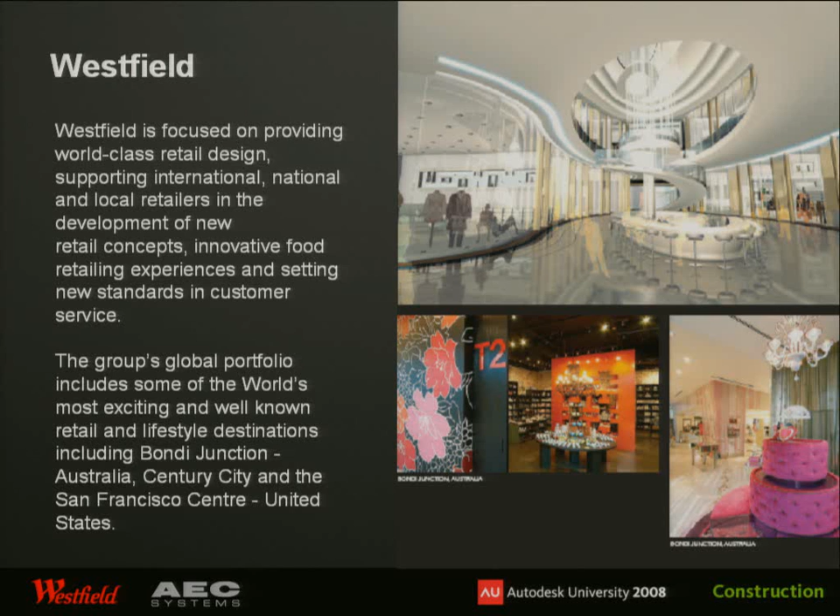AEC Systems, well, we're a reseller. We certainly have been working particularly with Navisworks since before the Autodesk acquisition. So we're the most experienced when it comes to Navisworks integration through things like construction. Also in the mining field, we have a lot of clients who use Navisworks in mining and resource planning and resourcing. And also moving now through into pre-design, so Navisworks being used in architecture, and now obviously with Westfield's use of it in construction planning.

I've got another animation, that's a little note for me, so just bear with us. You've all seen that one. So as slick as we're trying to be.

What I might do before we just start here, we're trying to do this as a presentation of 2 halves. There's the glitz and the guts. So being an architect, with my architect hat on, this is certainly the glitzy part. When we finish my presentation and hand over to Gary, you'll see that's definitely the gutsy part.

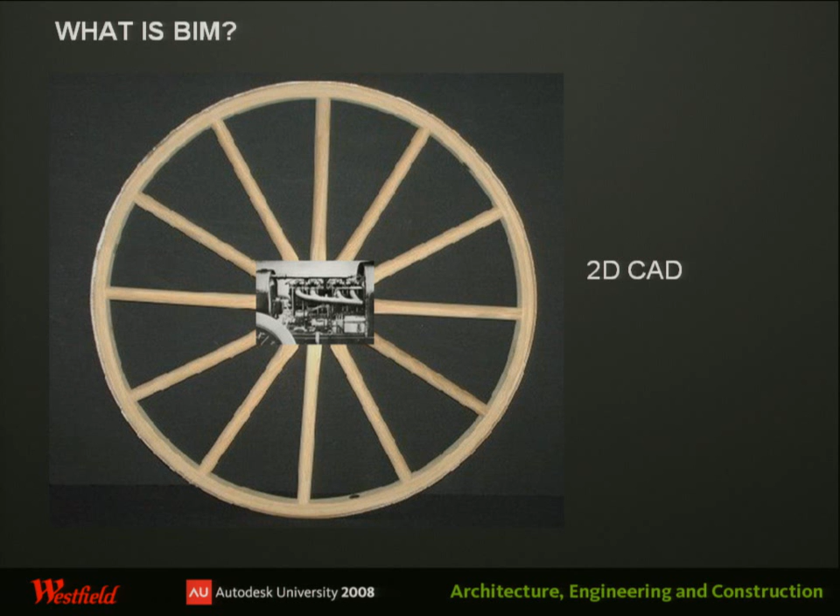So at Westfield, we've invested millions of dollars. We've gone Revit. So today, we have this. All right, we've got a nice, sparkly V8 engine. I talk engines because most people understand engines. But it came a point, okay, we've got this new Revit engine, it's fantastic, it sparkles, it's great, everybody's talking about BIM. But at Westfield, I asked the question, what are we getting on the rim of the wheel? And all we were basically getting is drawings still.

And to me, if we're only getting drawings, that means we're still only using 4 cylinders. So the question was, what are we doing with the other 4 cylinders? And to me, the other 4 cylinders is the BIM information. Because everybody's scared, especially in construction, if you mention the word BIM, it's got the word modelling in it. So therefore, construction goes, oh, it's nothing to do with us then. That's you lot, that's nothing to do with construction. So I've had to explain it this way.

And the reason I've shown that wheel is because it's got 2 channels, so it's got 2 spokes. One channel is, how I see it, the traditional way of delivery. And the other channel is the BIM information. And they tend to understand that, they can get their head around what BIM is now.

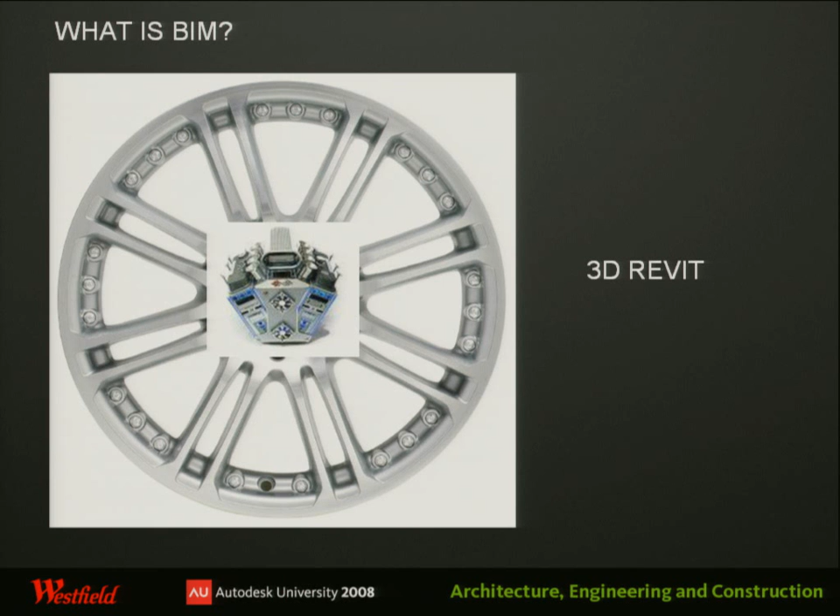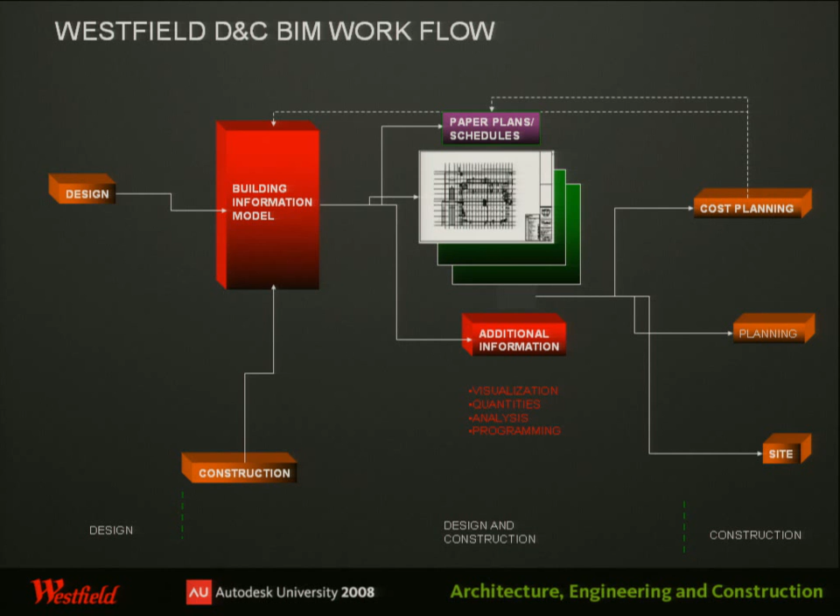And this is just a little graph here. In construction, they're all worried that you're going to take their traditional drawings away from them and all this. So we've come up with this little chart here to show at the top, they still get their drawings, they still get their schedules, but BIM is additional information.

Now here's my Lego. So I'm going to tell you a little story. I've got a little 7-year-old boy, and the other week we bought a Lego. So we've gone home, he's opened the box, thousands of Lego pieces in the box. And he says, how are we going to make this, Dad? So I says to him, don't worry, son, I'm a construction planner. And I can exaggerate, I said, I'm the best construction planner in the whole wide world, actually, little man. I said, wait until the morning, I'll do you a construction program. So I did. And there it is.

Okay, so there's the police station of this Lego city. Fantastic, you know. Select 2 single white columns, 50 millimetres long. So I gave it to him, and this is page 78 of it.

I said, here, son, come in. You can be the foreman. There's your program. So he looks at it, walks away. Like a typical foreman, he came back and said, I don't understand that. That's no good to me. What am I supposed to do?

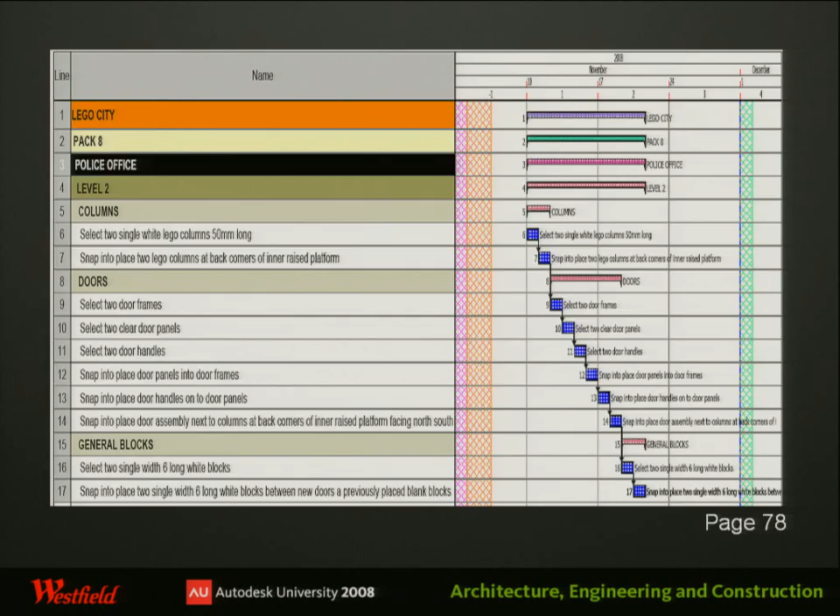I said, take a couple of days, try and understand it, come back in a couple of days. So 10 minutes later, he came back with his hand behind his back. He said, Dad, at the bottom of the box, I found this. Can I use this? I was devastated. All that hard work, all that planning, and he's come out with this.

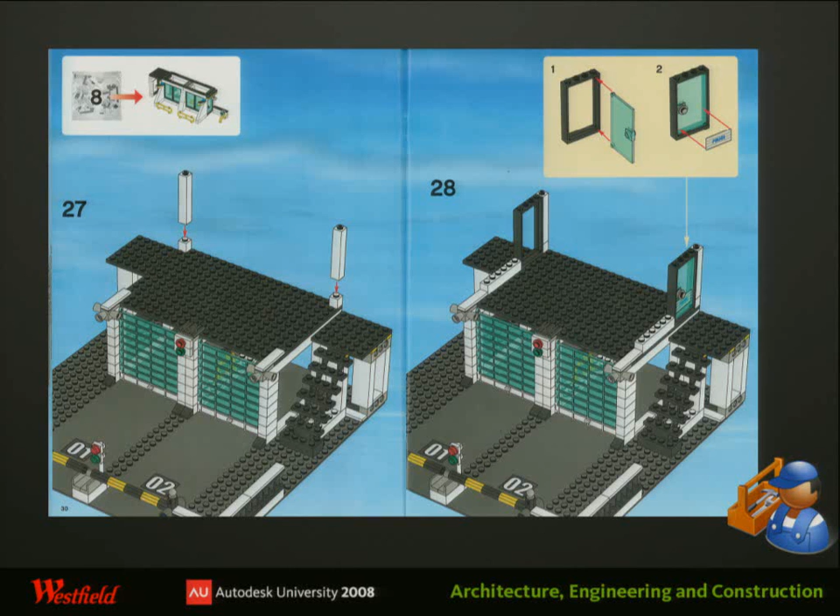So what I'm saying here today is what Navisworks does, it's Lego for adults, Lego for grown-ups. And there we go. It's not quite the same as Lego, but it's close enough.

I'd say you're all pretty familiar with Navisworks, or you're pretty new. I guess one thing is, just in the audience, who's here from a construction side or a contractor side? That's excellent. And who is using Revit, or who's heard of Revit or knows Revit in that process? We're fine then. All right. Oh, I'll stop there then, don't I? That'll do me.

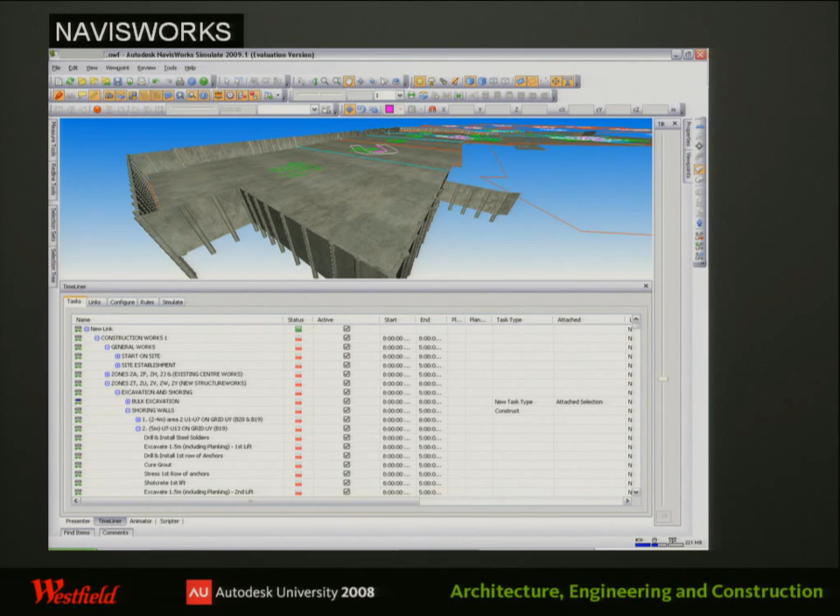Okay, yeah, so it brings the Revit model in, and it brings the construction program in. So the last couple of years, and Christian in the front here is very aware of this, I've annoyed the crap out of him for the last 1.5 to 2 years. Every day, why are you doing this, why are you doing that? And through that process, because they've been using Revit, but not really using it for BIM, for construction, there's a lot of things in the Revit models that we can't use because they're not modelled correctly. And here's just some examples of what they are.

So this is basically what my son said. So when you usually issue a 100-page program, the response is normally, my God, can you summarise it? And often a construction job will go off in a different direction because a foreman or a site manager doesn't understand the construction program, so he'll go off on his own and do something else.

Okay, just before we start, I'm just going to show you the Revit file structure, Navisworks file structure. So you start off with your Revit files. You might have, say, 4 files that make up a model. They're exported to an NWC file, which is then all linked into a NWF file. It sounds quite complicated, but it's very simple. That NWF file is a very small file. It doesn't actually open the NWCs, it only reads them.

And then from there, we do an NWD file, which is basically a snapshot of your Revit model at any time. And it's that file that actually comes to construction.

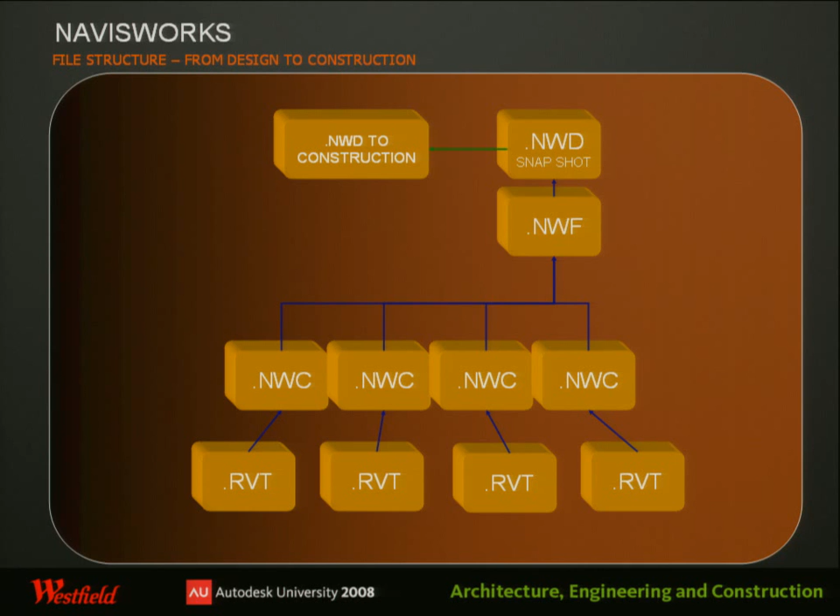And how long have they been using that now? Who designed that process? How long have we been using it? 6 months? It's all very new. I've always used it. I've used Navisworks for about 2 years now. But it's only now that design are listening to construction, because we want to use BIM. So design need to know how they have to give us this BIM. So it's only now that I'm getting NWD files from design. Whereas before it was only my own work and I would show them. Okay, so that's the general file structure for construction.

So this one is for design. So you can see you've got month 1 and month 2. The good thing about that is, like I say, you can do a snapshot in time. So at the end of month 2, you can compare month 1 and 2. So from that NWD file on your right, you can make another NWF file and compare the 2 NWD files. So this is good for if you want to check your productivity, if you like. How much has the model changed in 1 month?

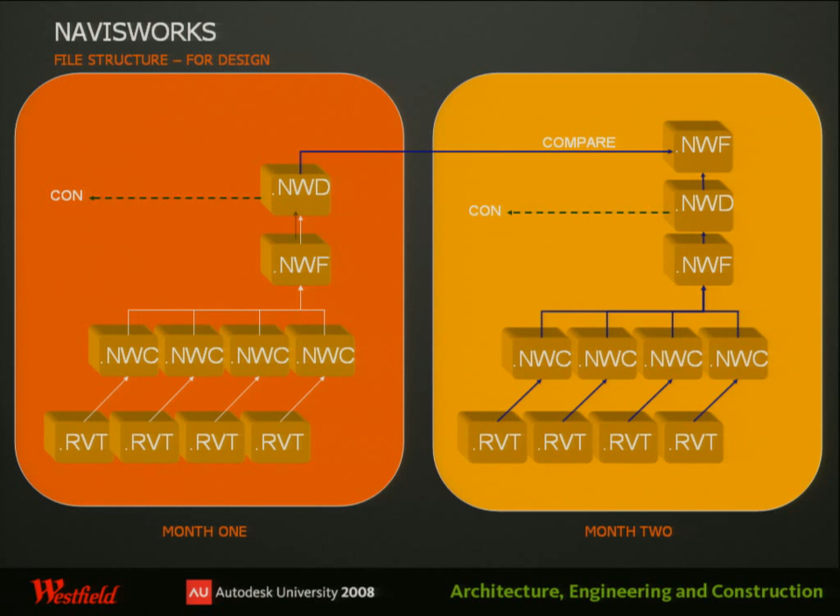And if you had a snapshot over several months, you can compare the first one to month 10. So you can actually see what your productivity of the model is. Okay.

One of my biggest issues is the generic model, the generic family. I'm not even sure what it's called, I just know it's generic. As you can see, this concrete slab is apparently done in an in-place family, with subcategory individual concrete slabs.

So when you bring that into Navisworks, it can't read them. Well, it brings over one big thing with minimal properties. So if you want to find things in Navisworks, you mainly use the properties to find things, but if it's a generic model, it's hopeless. You can't do anything with it. So when it comes to simulation, I have to simulate the whole thing, I can't simulate the individual pours.

So that was pretty typical of how Westfield would have modelled it. It's modelled correctly, as in on the plans, the documentation, the sections, it's fine. Documentation-wise, it's fantastic. But unfortunately, seeing they got Gary involved now, he's made them work harder.

Because when it comes to Gary's team, who now have access to this model, he's saying, hang on, that's not right. So you said you've got a chair now doing your design. Well, yeah, I should get a chair there. They keep offering me one.

Not only can I not simulate it, we are trying to use the Revit model to take off quantities as well. And we're using a software called CostX to do that, and if a generic model comes in, it just measures the whole volume as one, and it's hard for the cost planners to actually work out what it is.

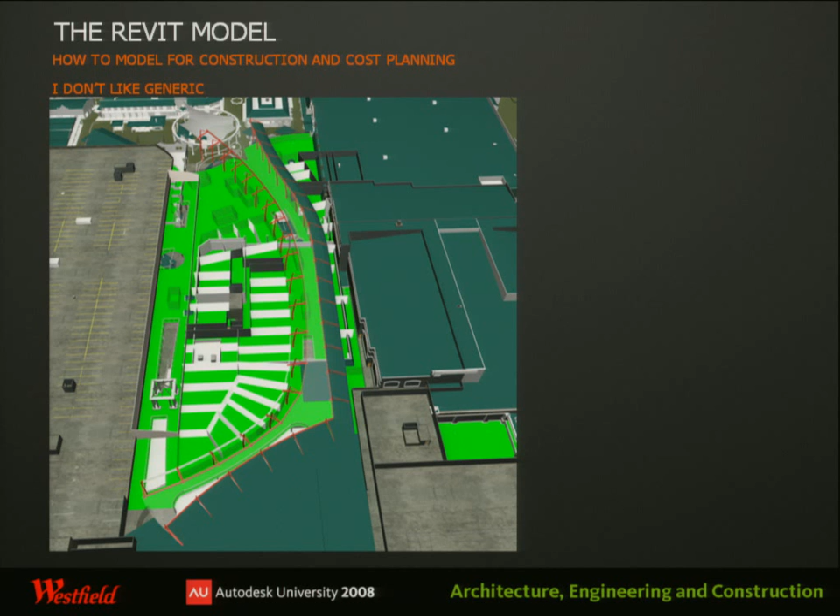As Gary goes through the presentation, you'll see why. So move to the next one. So basically, that's the whole generic family there, whatever it's called. Now, the reason that's no good to you, Gary, is what? Well, I've explained it, it's got minimal properties. I can't simulate each individual pour, and when it comes in for the quantities, it's just measured as one mass of concrete, which doesn't really work for the cost planners.

Because the cost planners, they're hard work, and unless it's right, they go, well, stuff that, I'll just use what I've been using for the last 150 million years. Okay, so here's another generic model, this is a parapet wall.

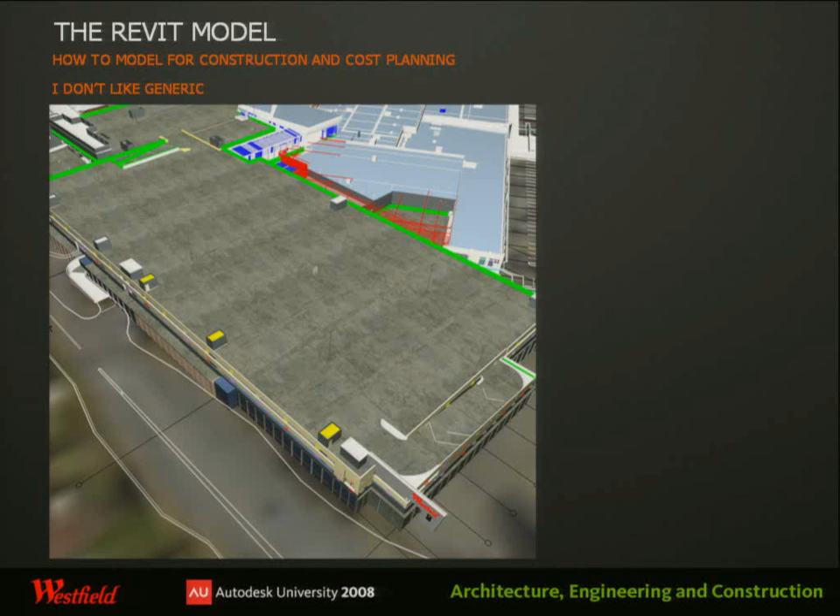As you can see, everything green is just one generic family or model, I don't know what it is. I'm not sure of Revit terminology, so I've just called it a system or category family type. So if you use these type of families, as you can see in this hose reel, I can actually select the hose. So I guess they work.

What we're experimenting with is the ideal ways and workflows of getting information out of Revit, feeding it into someone like a construction firm. Now, the luxury that Westfield have, and you might have firms in America that do this as well, but from my architecture background, we hardly ever would deal with the construction firms. So the plans go out, if they want a couple of animations they can have them, but generally the constructors don't see that, they're working off the plans only. So how we get to those plans, and obviously within Revit it's a very efficient system.

We know that there's change management, we know that there's consistency throughout the drawing package or documentation package, but how we actually model the individual items, there's no real feedback. So, we can get away with things like this.

But with Westfield, because their construction division and their design division are in the same building, although separated by, 2 or 3 floors? 2 floors. They wish it was bigger now.

Gary's now interrogating that model through Navisworks, going back to those guys and saying, hang on, you need to improve the model. So it's not as if it's wrong, but it needs to be improved. So I guess a feedback cycle that Westfield are doing, and that's why we're here for a presentation like today, would benefit the rest of the industry. The ways that they're now modelling their building for documentation is with a construction planning thought as well.

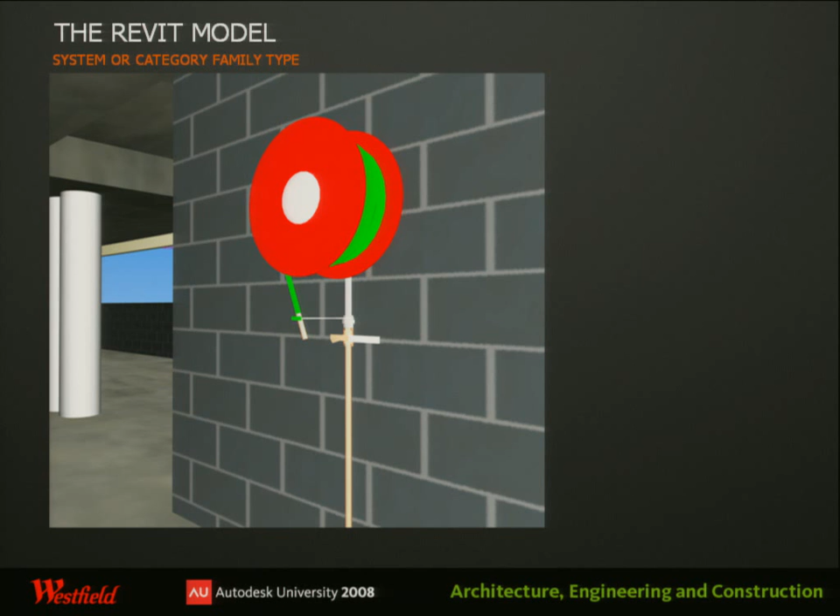And I had a big issue. I was, oh no, we can't. That's too time consuming. And then I learned there was a split tool. Split walls. So that's really time consuming, is it? You can still draw it, just split it where the expansion joint is. So now they've started to model as it is in the real world. If there's an expansion joint in a wall, put it in, put a gap there.

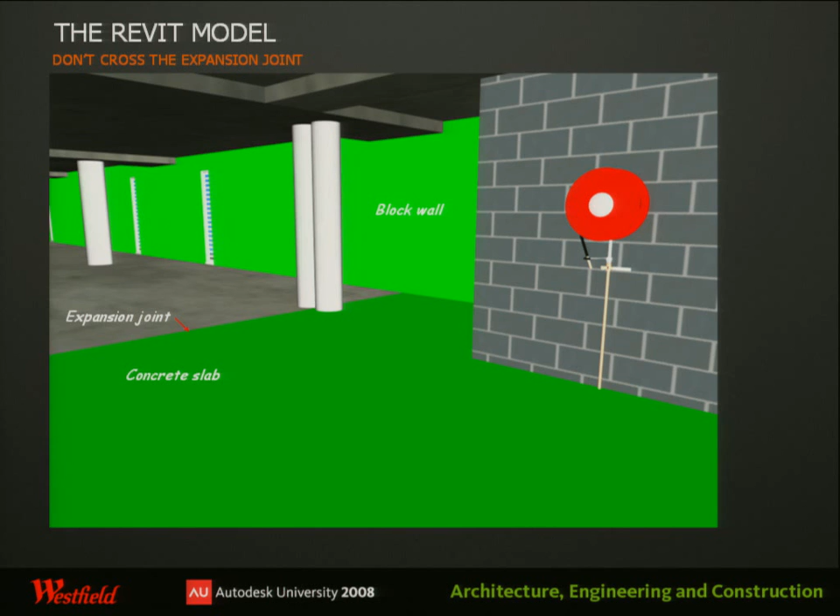What's my next one? So what this slide's about is, in Navisworks, there could be 20,000 objects. So my question is, where is it? Give me some idea. And what we started to do in Revit is putting our zones in and structural blocks in. Actually, in Revit itself. So when it comes over to Navisworks, you can't really see it on the right, but I get the properties of them. So I can go and search for everything that's Zone E or on structural block 7. It just makes looking for things a lot easier. So they're located within a construction area? Yeah.

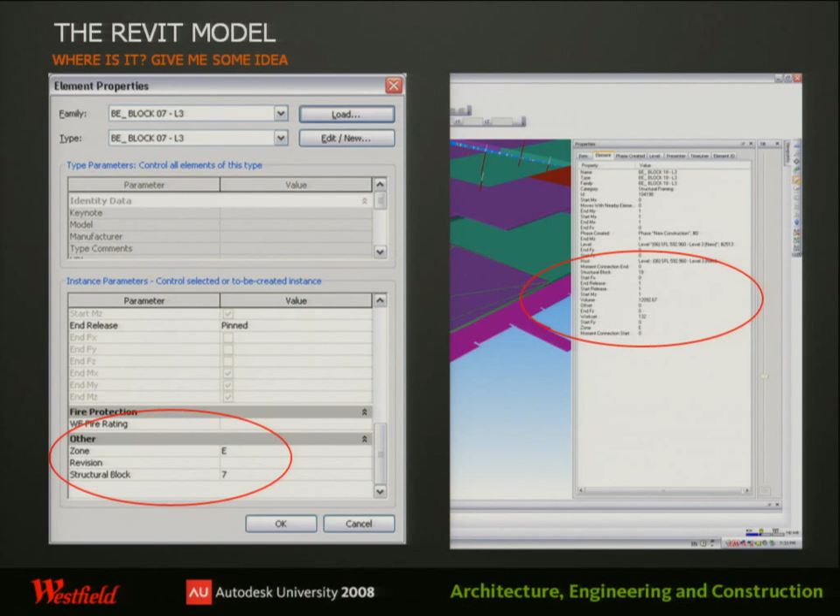Yeah, so now they're fed back into a building from day one. I think the process would be that a general building site, you'd block it up into construction zones? Yeah, we use construction blocks, basically a pour, a concrete pour slab. And once you set that up, then you feed that back into the design team who know how to allocate that parameter. That's right. Yeah. Have you guys developed a design language between you and the architects with every future project now? They know when they're designing it to classes and areas for different zones, when it gets to you?

Well, actually, the actual zones come from the structural engineers, and then everything is based on that. So they know well in advance. But the design language, I think, is a good one. It's basically do as Gary says. Yeah, that's it. Do as you're told.

If you're setting up for concrete floors, what about all the other breakdowns that you're going to be using? You've got the zones for the pours, but everything that flows after that, masonry comes in when you're finished. But the masonry is still in that structural block. So the question for those who couldn't hear it is, it's fine for the pour, but that zone terminology is going to be used for every element in that model. Yeah. So whether it's hoardings or whether it's walls, they're all associated within that zone. In that block, yeah.

As a construction planner, I do everything as a structural block for structure. Then when it comes to the finishes, I do the wider zone, like mall 1, mall 2, that type of thing.

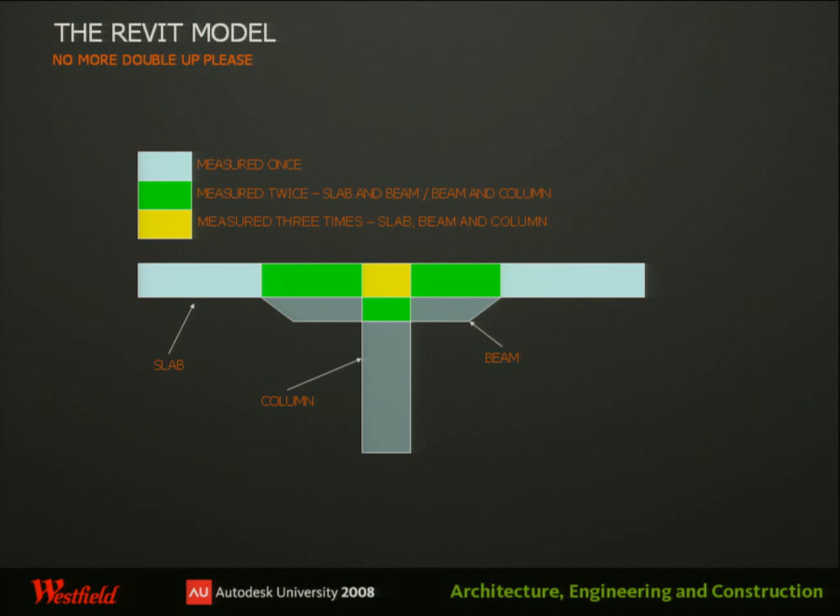Okay, another thing we've done in Revit, this is purely for the cost planners, we were getting the Revit model coming over into the quantity takeoff program, and it was just all by your family categories, which obviously the cost planners didn't understand. So we've customised our assembly codes in Revit. And we've actually structured it as per the Australian standard method of measurement. So everybody knows where this list comes from. So now when it comes in, the cost planners know exactly what is what. Right. Is a slide coming up with your wheel? So basically explain who uses what. Oh yeah, it's coming up soon.

Okay, this is the window you get when you export from Revit. The only reason I'm showing you this is the world units. It comes over in feet, and I would recommend you just leave it in feet, even though we're all metric in Australia. They're all feet. Yeah. But we have to leave this in feet. I've got no idea why. All right.

Okay, another thing we've been doing with Navisworks. You've got 20,000 objects in the model. I've got 7,000 activities in my construction program. The problem with Navisworks is you've got to manually link them. And the problem is it's like Revit's made of all squares. The construction program is made of all circles. And there's nothing similar that you can bring them together with. Even though Navisworks has got these auto rules, you have to have a common property to actually bring them together.

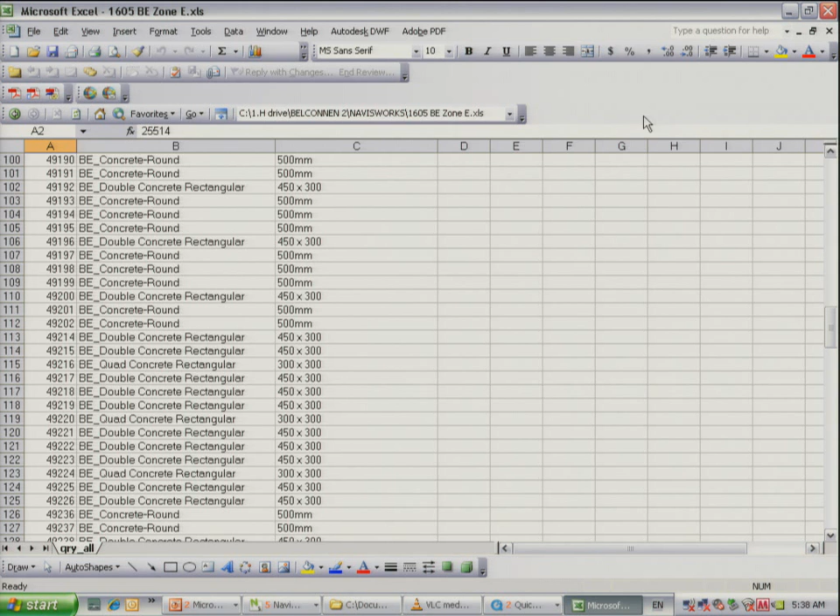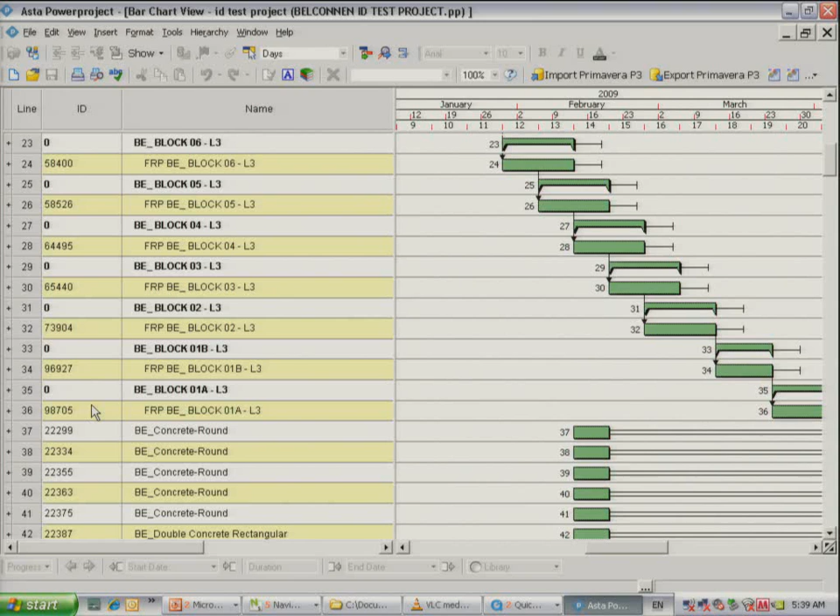Now, why isn't that open? Oh, there it is. So this is how Christian gives me all the objects, and they've all been exported from Revit. So I take them and I dump them into my planning software, and there they all are. The only thing I'm really trying to get out of it is these ID numbers. If I've got the ID numbers, then I can use the auto rule in Navisworks to link everything up.

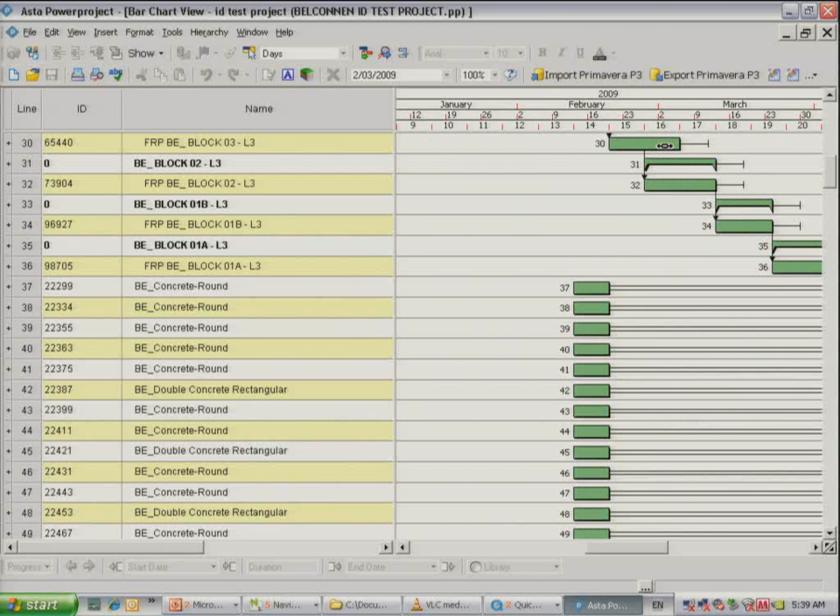So everyone's familiar that Revit, at the end of the day, is a very visual database. Every element in Revit has an element ID, which gets automatically assigned, and it's a unique identifier, as in the case of a database. So through Christian's work, we've extracted every single element out with the unique ID property, which then gets converted over to a Navisworks element.

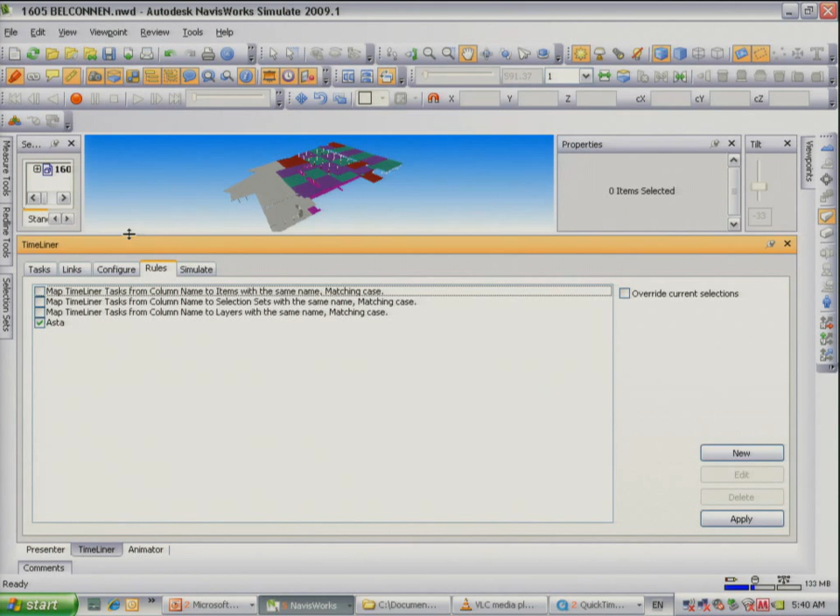You're extracting that out of Revit or out of Navisworks? Out of Revit. I wish we could get it out of Navisworks, but that's something we were talking to Autodesk about. Let me just find this. So what that allows me to do is when I bring it into Navisworks, there they are. And by using the ID, which is up here, I can run these rules, which automatically link my objects. Navisworks traditionally has an auto rule called layers, assigning tasks by layer.

Now, Revit doesn't use layers, and the layer schema, as far as AutoCAD is concerned, is fine for elements, but to break it down to its individual elements and zones that Gary needs, the element ID works a lot better. Quick question. Before you brought it to Navisworks, did you just bring the Excel file into that schedule, or did you bring the schedule you had created in that other program into Navisworks? I took the Excel file and just copied and pasted everything into the planning software.

And then I work with two screens. So if you look at this one here, I say, right, what is that slab there? What's that portion? For those that aren't familiar with Navisworks yet, see, I've got an ID. Every element has the properties associated with it from a package like Revit. So the BIM information, the data about the data, Navisworks understands and can show and can search by. If you're not using a package like Revit, if you're just modelling, you're not going to have that data associated with it. So now I've got that ID in my planning software, and I can use that auto rule.

So I've got two screens. I want to start the construction process from this slab. I find it in my program, and I can summarise it and put it where I need it. I hit the auto rule, and as I go along, you might be wondering why there are all different colours. That's just a visual thing for me to know that's been simulated. So that has, but this grey hasn't.

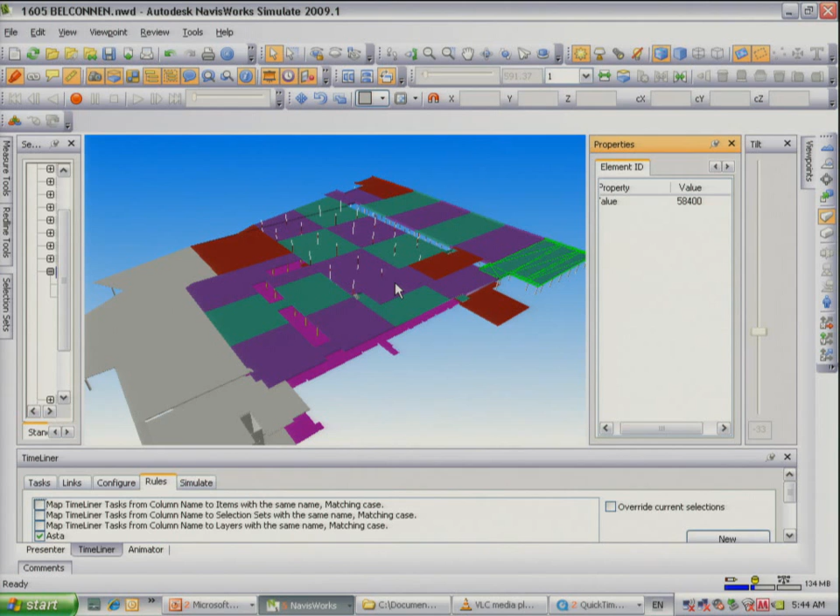Go ahead with that. We're getting in time. Yeah, I know. That's fine.

When you're downloading the data from Revit into your scheduling program, every time the Revit file changes, do you have to re-import it? Yeah, and I'm worried about that myself. The only way I can do it at the moment is in the Excel thing, delete anything that's the same. So it's just an experiment we've been working with.

Once you bring the activities into your Navisworks, you make sure they're in the proper order from the construction program, in the planning software itself. Oh, you do all that. And that's what I mean. I work with two screens. So that takes a long time. Well, it doesn't really, if you compare it to what you normally do. But you have to take an element ID number. Yeah, which is easy to find, and you just drag it to where you need it. Yeah, it's quite simple to do.

So the analogy, because we obviously spent a lot of time thinking about this, the analogy of the Lego is that when the element IDs come into Navisworks, you sort of have a whole bin of Lego. It's a bit more organised than just a bin of Lego, but what Gary's then doing is assembling those into areas to get the construction plan to work.

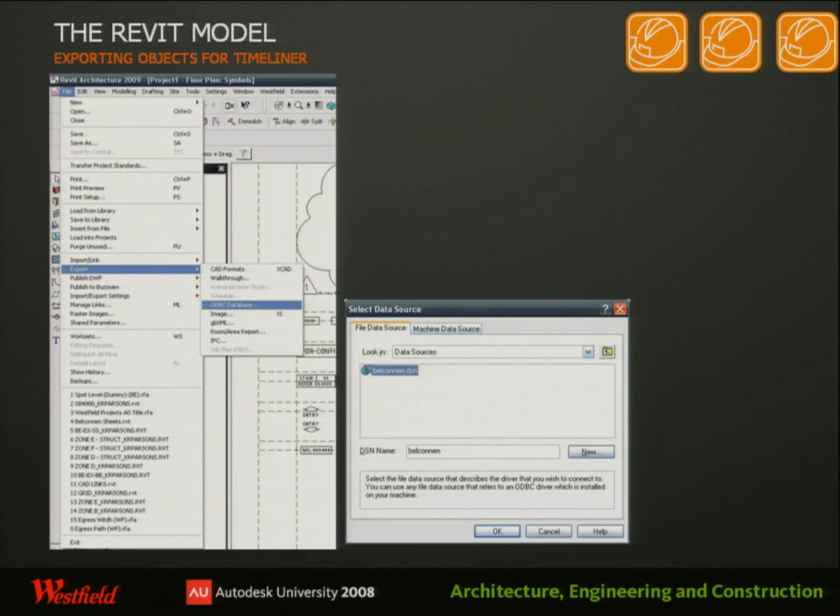Oh, what happened there? Okay, so that's that one. If you've got any questions for that, we actually have Christian here in the front, who knows all about this. All right. Can I jump ahead too? Yeah. That's the one. We probably should have started with this slide first, but we're working on it. The next presentation we do next year will be much better.

This is the sort of way that the departments within Westfield, what software they utilise and how they work together. And Gary, if you want to just go through. No, you've done a good job. So basically we're using Revit, design using Navisworks Review. I use Navisworks Simulate. In costing we use CostX. And how many people in each of these teams? Design's a very large department. Planners, we have about 30 construction planners. Cost planners, about 20 people.

And in the history of this process, the Revit came first? The Revit came first, yeah. And then investigating things like using Max to take some modelling on? Yeah. I've had a play with Max, and you'll see in a few slides what I've trialled. For people who might not be familiar with some of these tools, Design Review is a free tool available from Autodesk. CostX is available in America, and there are some people here who represent CostX. But all of these are investigations: once you've got this BIM model, what else can we do with it?

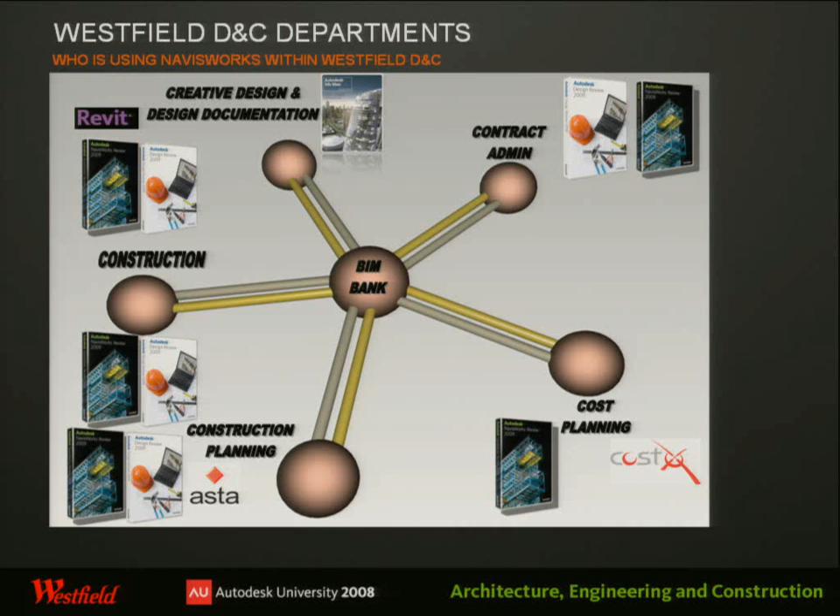Okay, so why are design using Navisworks? Obviously to do markups. It's easy to move around, see problems with the model, and this is a great example here. Great big holes in the wall. Sorry, why don't you do that inside Navisworks? That's where you do it now. What's that, sorry? Why don't you just do the markups inside Navisworks? Yeah, this is in Navisworks.

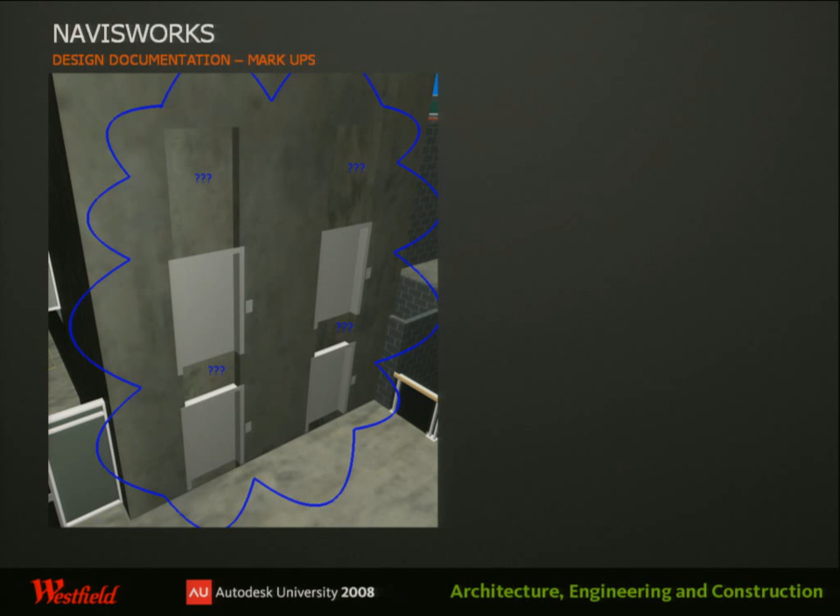Design Review is used where in the scheme? So Navisworks does a lot of markup and redlining as well in a 3D form. There's also still the construction documents they can utilise in the 2D DWF. Yeah, I've been asked that question. I mean, it depends which one you want to do it in. But if we're using Navisworks for all this, and they've already exported it all out into Navisworks, they might as well use Navisworks for markups.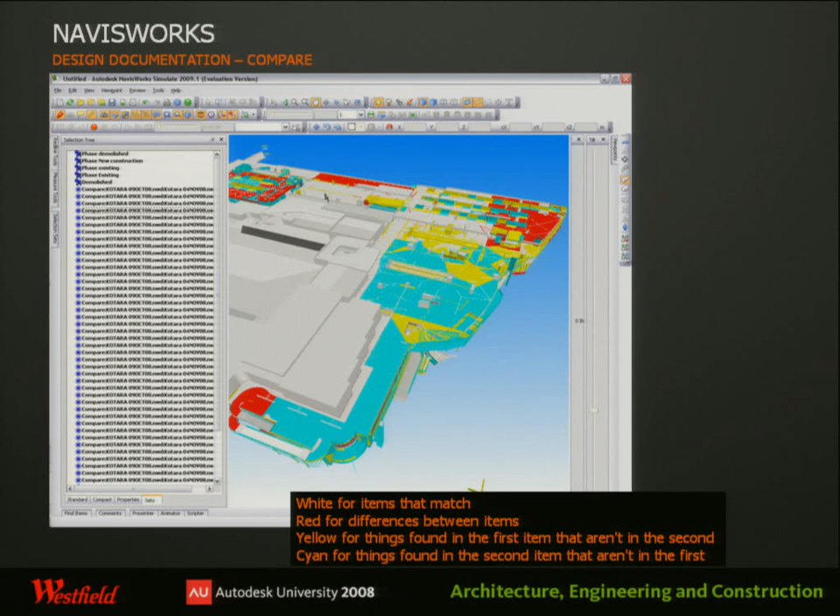So, just so we're running out of time. This is that compare I was talking about earlier, where you can compare two models, and it gives you reports on the right. And if you read that little legend down the bottom, obviously everything white, nothing's changed, things like that. So you can utilise that almost like a milestoning. So, as you said, you know what's happened. Because again, the Revit model is always changing, always developing. It's hard to go back to last month's Navisworks Revit model. Or in this case, they've got it. Yeah.

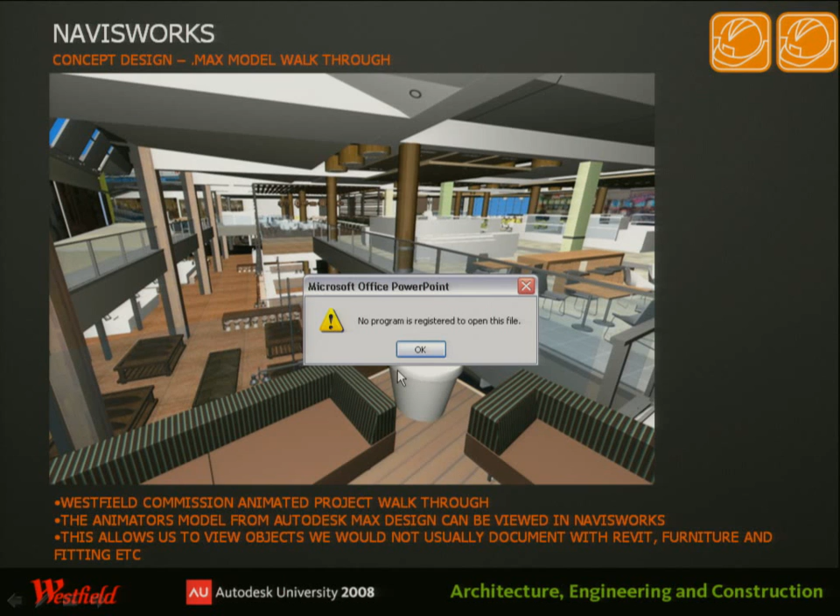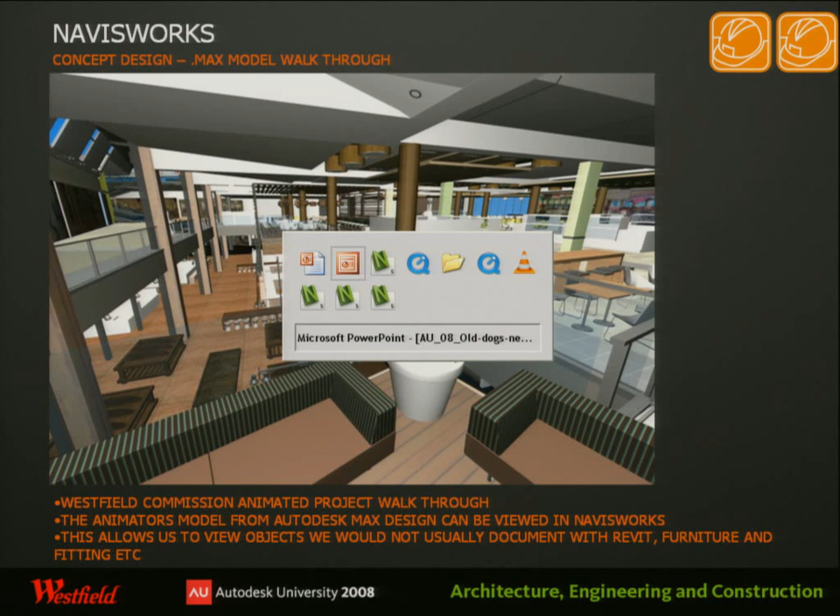Sorry? For the slab wall, we have a 3 days cycle. Yes. 2 days for the forming, and the question is basically, you've got a simulation coming up, I think, where you've actually got the piering, the individual columns being put in. Yes, I have, yeah. Okay. Well, do you want to grab us afterwards? Because we'll go through some simulations that might show that, but it might be easier if we do one-on-one.

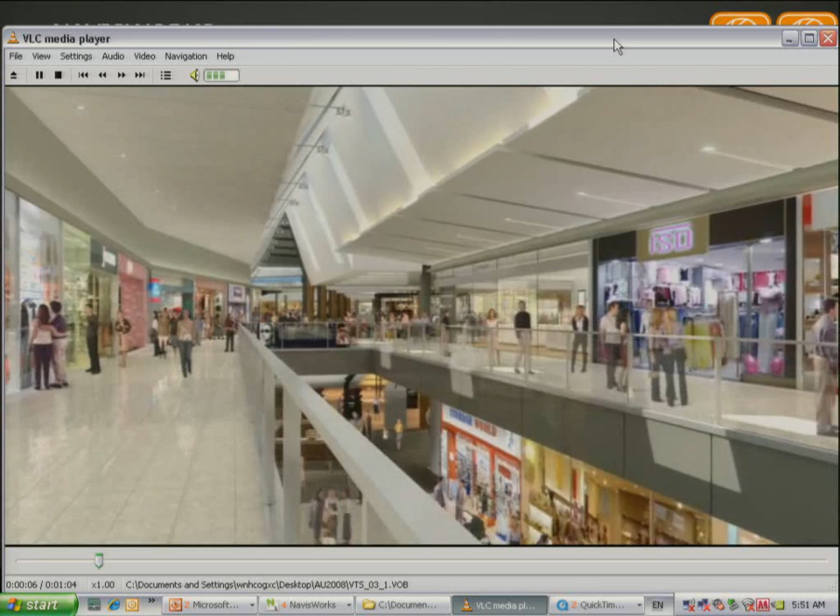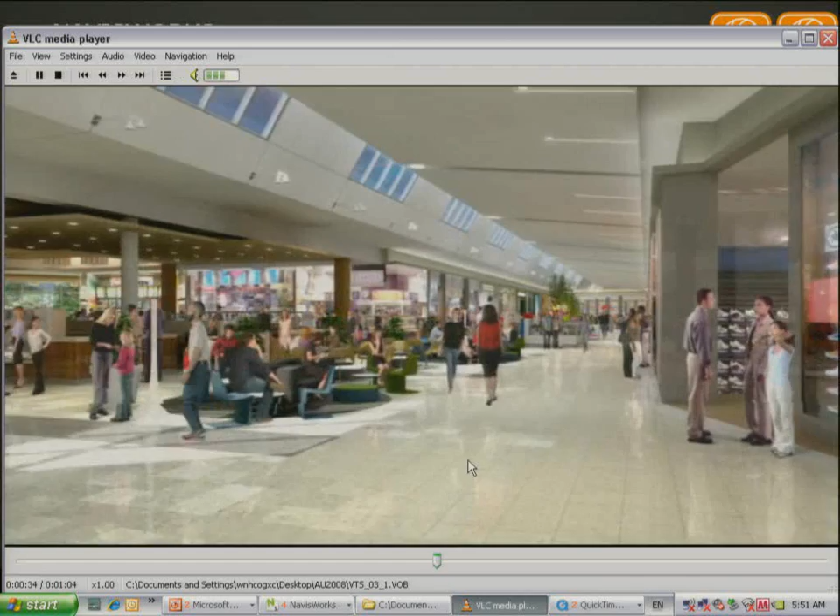Yeah. Okay, with concept design, I'm just going to show you this. No, hang on. We said there was going to be no more glitz. No, this is my glitz. So we commission walkthroughs, fly-throughs, whatever you want to call them. And these are obviously done in 3ds Max. Okay. And traditionally they'd use bits of the Revit model to help with that? Well, traditionally they would just buy the video itself, and that's it. We don't own the model, anything like that. Okay, so this is just one small section of it. And it's a marketing type of animation. Yeah. Okay, that's enough of that.

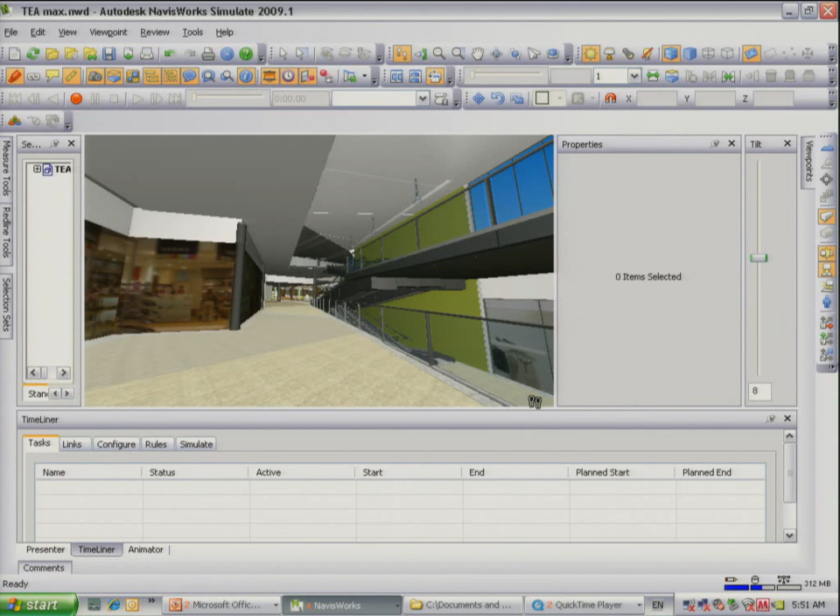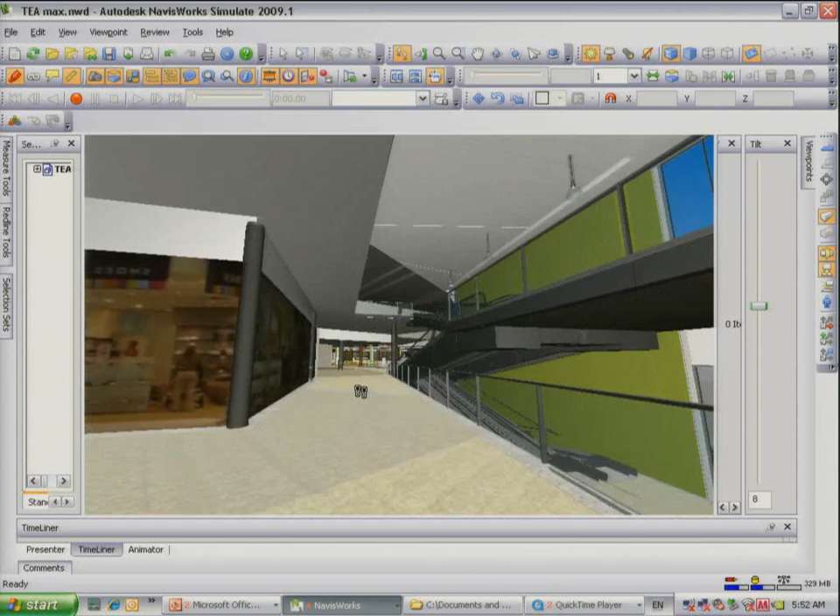So we had the idea, well, why don't we go and get the model? So Navisworks allows you to also bring in Max files, and the idea being that a lot of the modelling that Gary needs to see inside a project, even down to fit-outs and fittings, wasn't traditionally always in the Revit model itself. Yeah, so we don't model furniture or things like that. So I knocked on their door and said, well, it's sitting in your computer, can I please have the model? Just to have a little look at it. So, like I said, normally we just buy the video, but now we can actually buy the model. It's not as good as the Max, but this is for construction, remember.

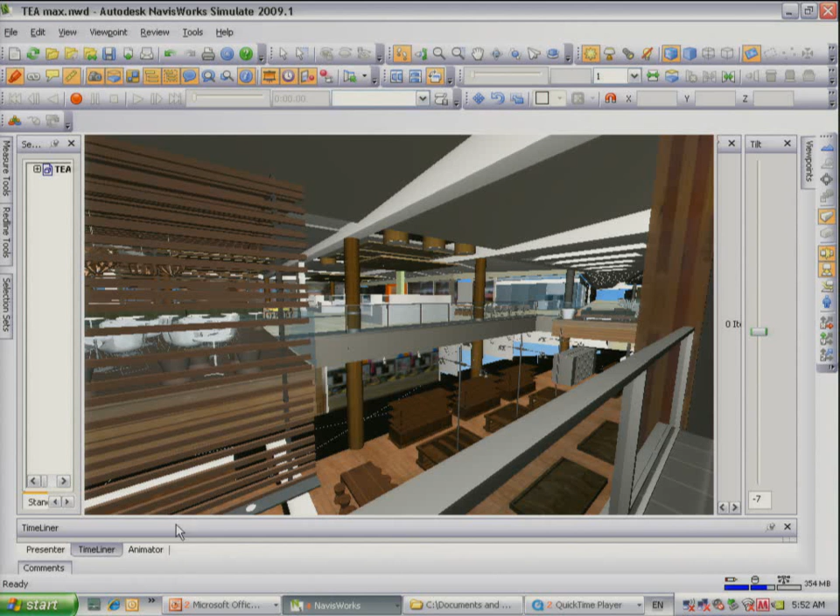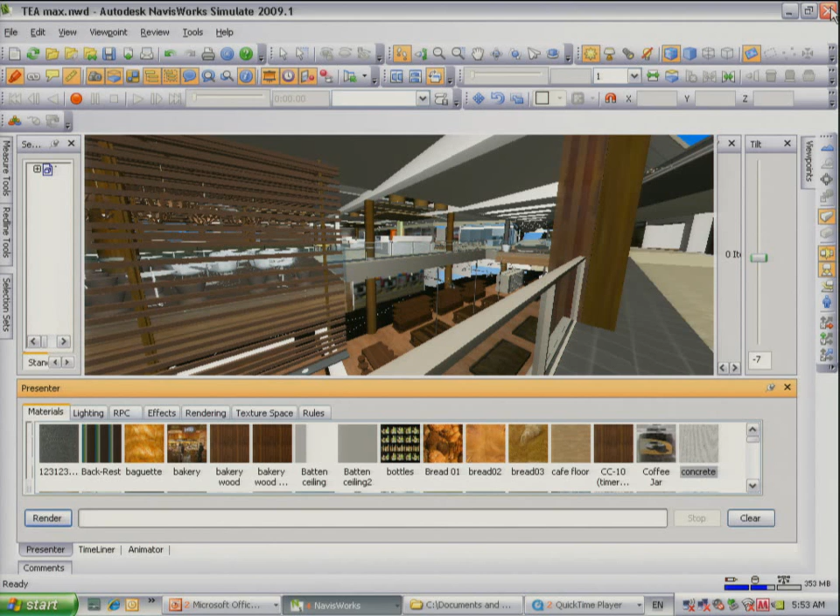But now, a foreman could walk through this and see the finishes that have come from the Max file. Okay? So that's just a little add-on, if you like, that Navisworks gives us. Instead of just buying a video, we can commission the video and the Max file itself. And that modelling work has a lot longer life because you can use it throughout the whole process. Yeah. And if I'm a concept design person and I don't like something, I can always just change the materials very easily to have a look. Well, that one didn't go. I don't know why that's not going. All right. But that's just an addition that we've looked at. Right.

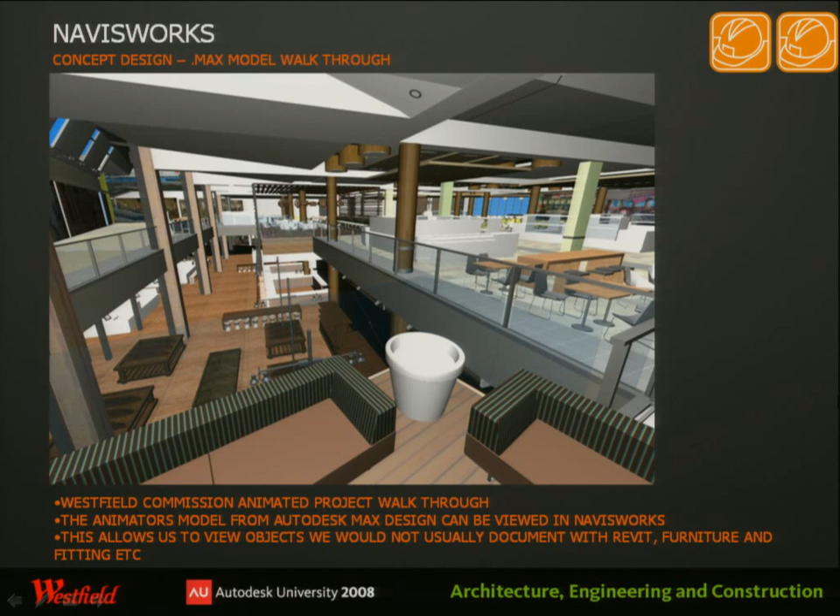So when it comes to linking through your timelining, because we're going up to 11 o'clock, I wanted to show that. The process of actually now staging that and getting all those elements to simulate rather than animate. Yeah, we're just going. This is CostX. This is how we use it in CostX.

We're running out of time. If anybody's got any questions, I can open a file and show you how it measures things and what you can actually do with it. Anything I click on the left-hand side highlights on the right screen, same as in the worksheet. If you double-click a quantity, it actually opens and highlights the model.

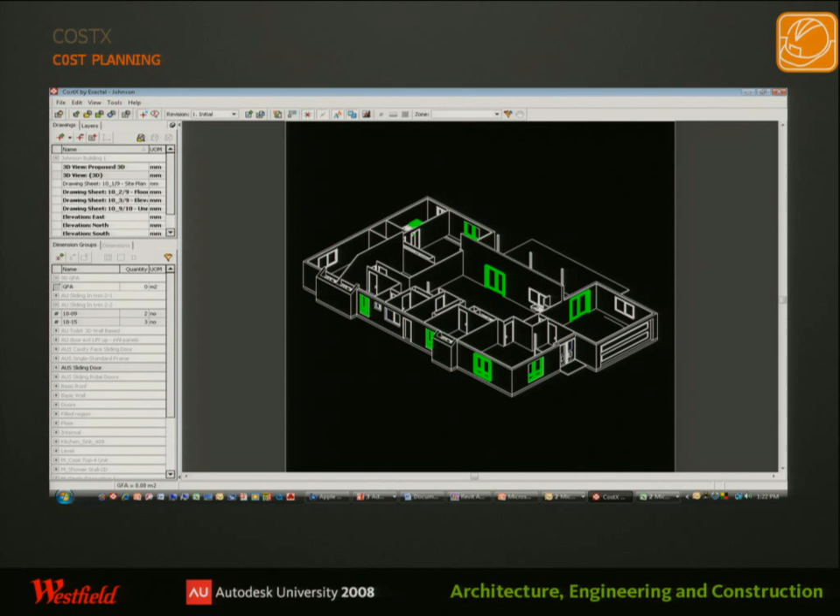Construction planning, cost planning. One problem we've found with the cost planners is if we dump all these quantities on them, they don't understand the job. Traditionally they've gone through every plan, taking their quantities off, and by doing that they've understood the job. So if you dump all this information on them, that's fine, but they still don't understand the job.

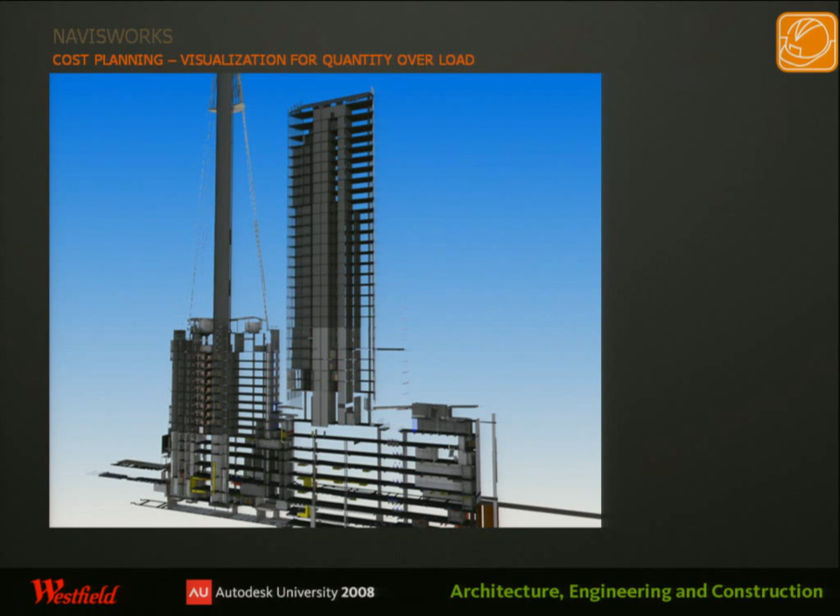This is where Navisworks is helping, I've called it quantity overload. So for them to understand the job, they get the Navisworks file and can actually walk around to understand the job. All right?

Construction, same as construction really. Navisworks is good for foremen to understand the full scope of a project, and they can walk around these projects in real time. So in the traditional sense of the documentation package, how long would it take to get your head around a project? Pre-Navisworks? We never do.

But you see foremen on plan benches going through drawings, just trying to understand what the job is. With what Navisworks gives you, the ability to walk around, up ramps, downstairs, and get a good understanding of what the job is.

The other thing you can do with Navisworks, another property you get is your phasing. Everything highlighted and selected there is phase demolition. So I can actually walk around the job now with phase demolition turned on, and I know everything I walk around is demolished. This is all trying to understand the full scope of the job. I'll just quickly show you that.

I'm new at this tab stuff. Which one was it? Pacific Fair. What's happening? There's always one technology glitch. Can you actually select those phases and have it? Yeah, if this opens, I'll show you. What's happening there? No, it'll come back to life. We'll jump back to... don't know.

It's the tool that Westfield use when they get into construction planning - the timeline, the tasking tool called Asta. Navisworks was developed in the UK, and at the same time as that team, there was another team developing Asta, so the two have always had a very strong connection. For those who have got Navisworks, Primavera, Microsoft Project and Asta are the main ways of getting tasks into the model inside Navisworks, then using the element ID tool to assign those tasks to the actual model elements.

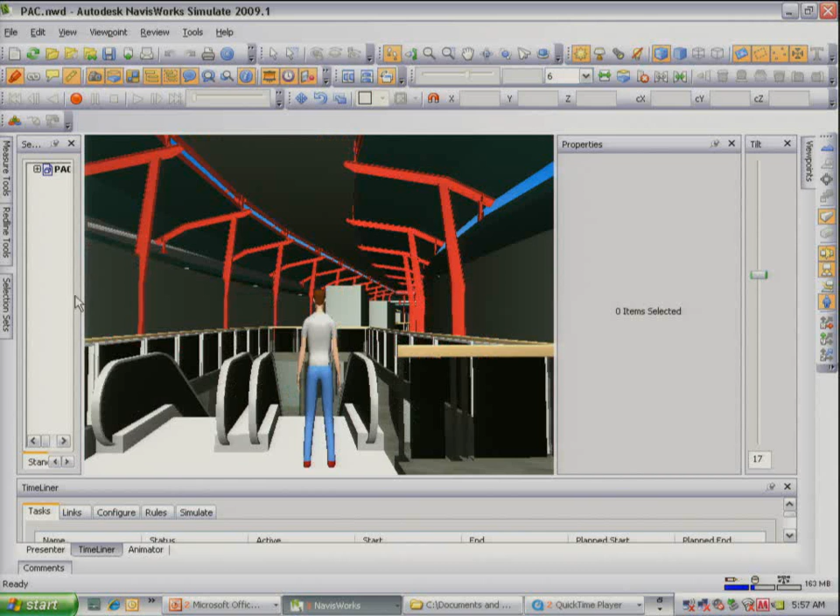So there you go. We can go into our selection tree - you can see where I've set up phase demolition, new construction, and all the others. I was just going to another view. I need to turn everything on. Typical. But yeah, so you can turn your phases on.

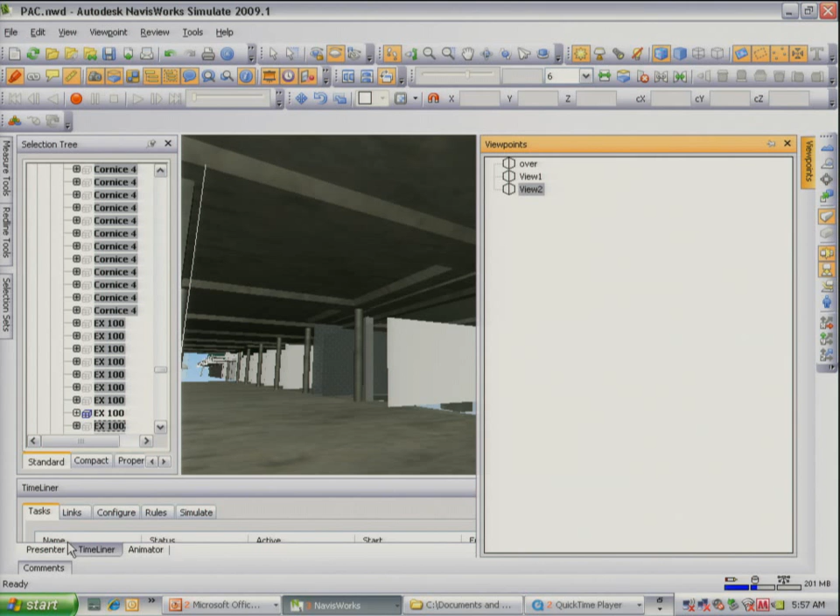That search is searching for a demolition property - it searches for a property in your find tool. That's right, they've come from Revit. In Navisworks? No, but that's where the timeliner basically does it instead. Yeah, the timeliner does that.

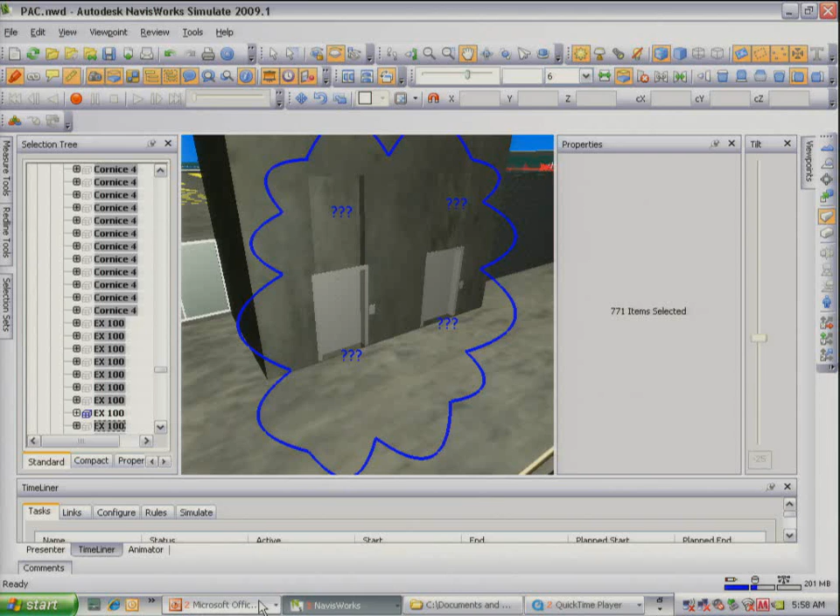The phasing needed - I guess a lot of people are saying, well, Revit has phases, can't we just do it all in Revit? The amount of individual phases you'd need to really simulate construction progress would be impossible. So that's why Navisworks is utilised instead.

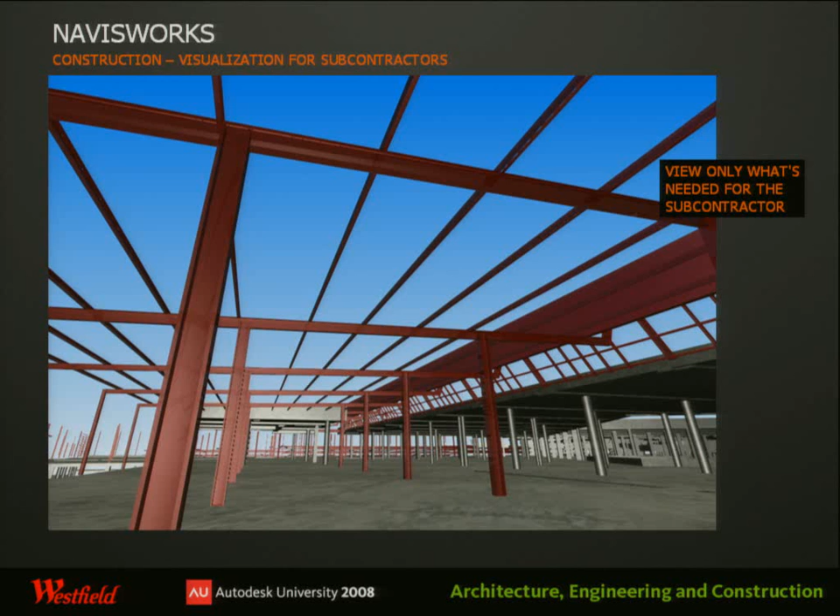For subcontractors, obviously in the Revit model, in the Navisworks file, we can turn everything else off and only have what we want the subcontractors to see - in this case, structural steel. And he can walk around the model. It's all about understanding the job. He can walk around and have a look. Same with the formwork.

Some of these modelling elements you were using Max earlier on, but the formwork, propping, and hoardings aren't normally part of the Revit model. That's our next stage - we've got this Revit model and want to turn it into a construction site. I've done these formwork frames in Max, which took ages since I don't have much experience. But the formwork was easy - I got the Revit file, copied the floors down, and made them a different colour, which gave me my formwork.

Is it the thought that the design team will start modelling those elements in, or will you always add them in extra? That might be the next stage - we might skip through that for now.

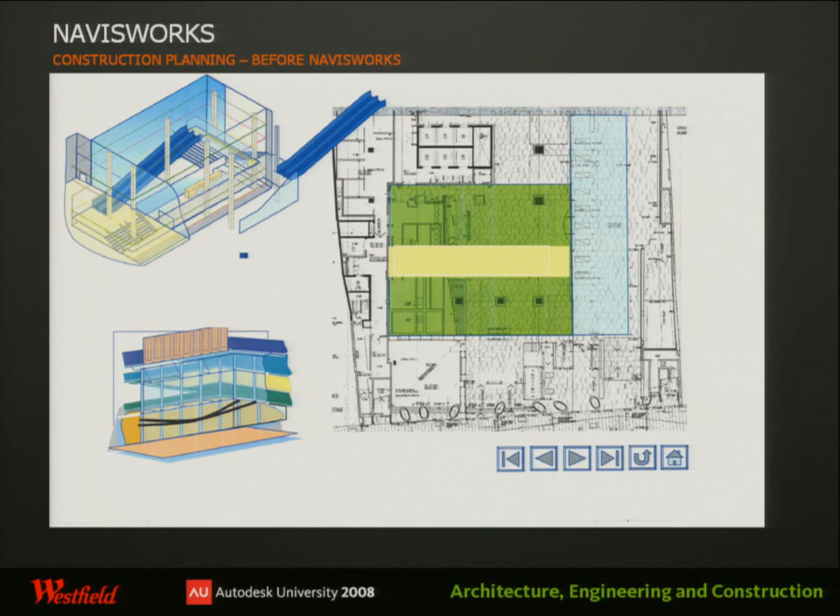All these slides - I've actually been waiting for something like Navisworks to turn up. Before Navisworks came along, I used to do things like this in PowerPoint, going back to when foremen didn't understand the construction program. It's very crude, but it worked very well - that's just PowerPoint slides.

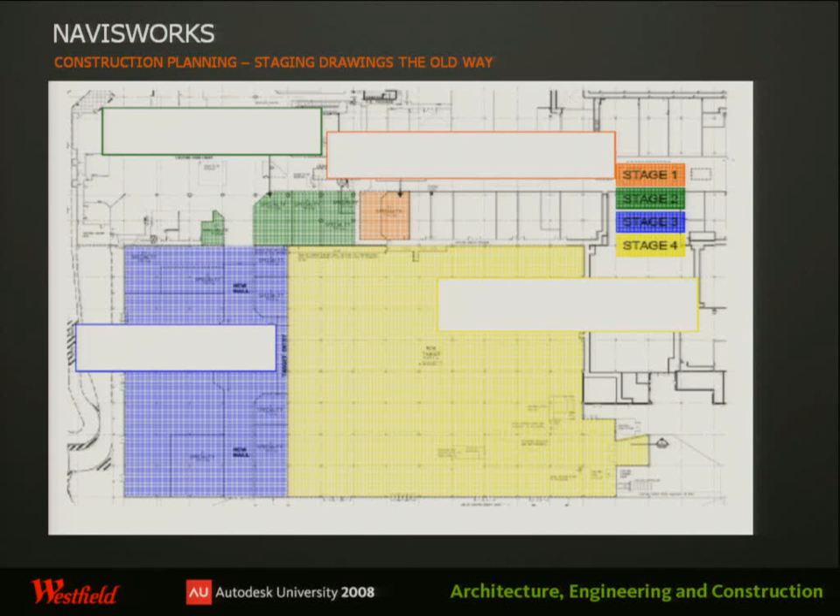This is the old way we used to show staging drawings. With Navisworks, we can print an image and people understand it more. So the communication you're able to do through Navisworks is improved, up and down the chain? Yeah.

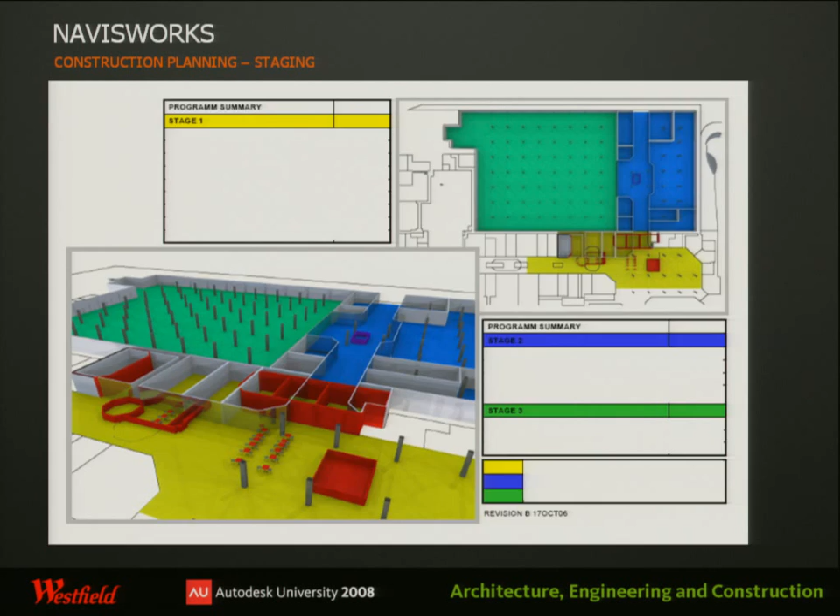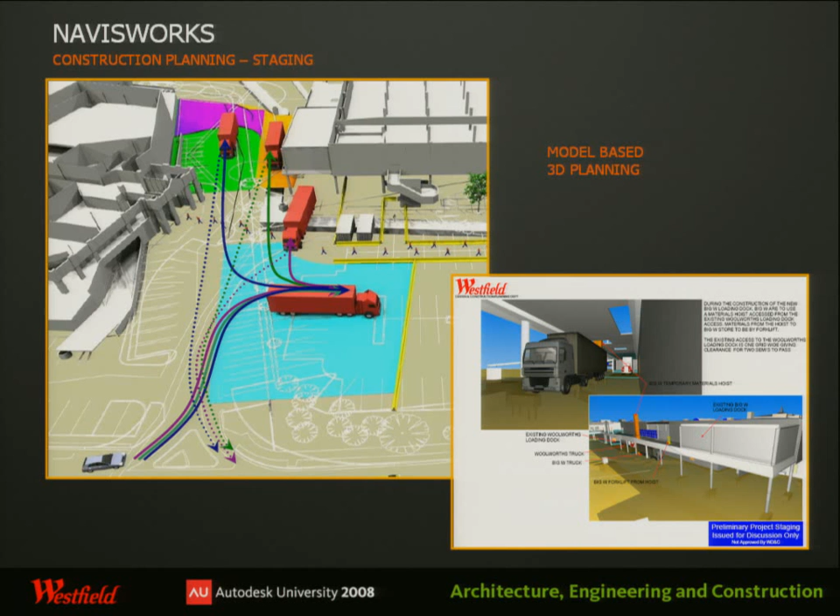No, we just do architecture at the moment. Some of the HVAC and MEP stuff you're looking at getting into? We've just started to use MEP now, so we'll see what happens with that. It's just more staging - it makes staging so much easier to explain than traditional drawing over a plan.

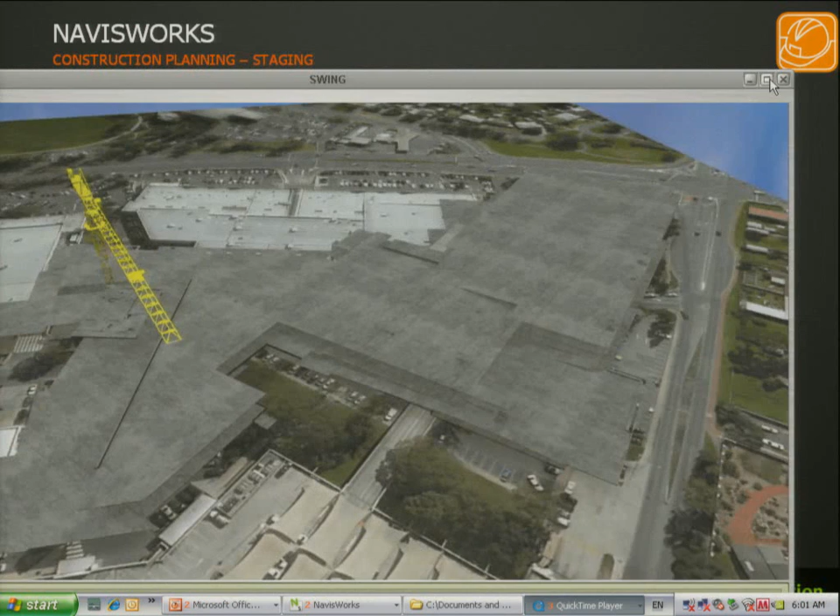Some site establishment - this is actually a SketchUp crane. I just got it on there to show you a bit of animation as well. In Navisworks, you can actually do some animation - this is my first ever try, just to see if I can make the crane turn.

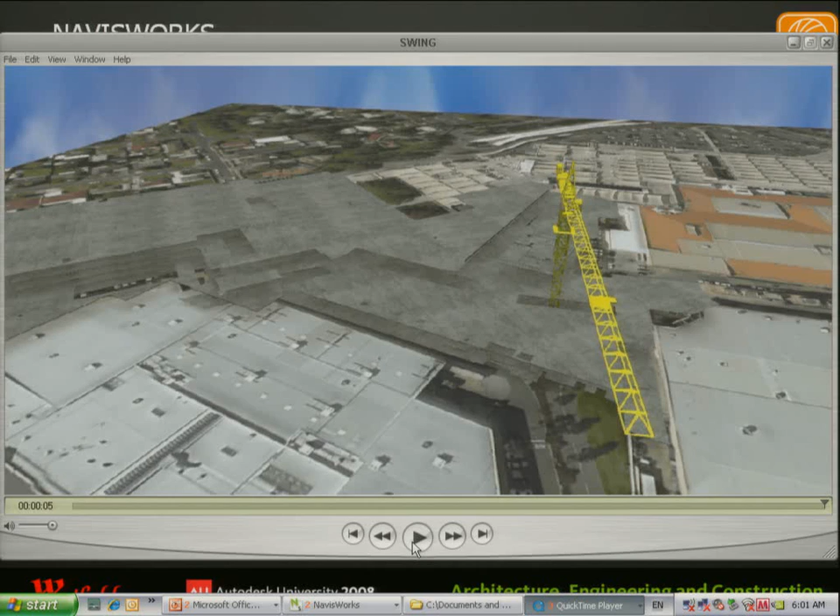In the current version of Navisworks, there's the animator function, so things like boom swings or moving elements on and off the site can now be animated inside there. I was very proud of that. You are, that's very impressive. Round of applause - thank you very much.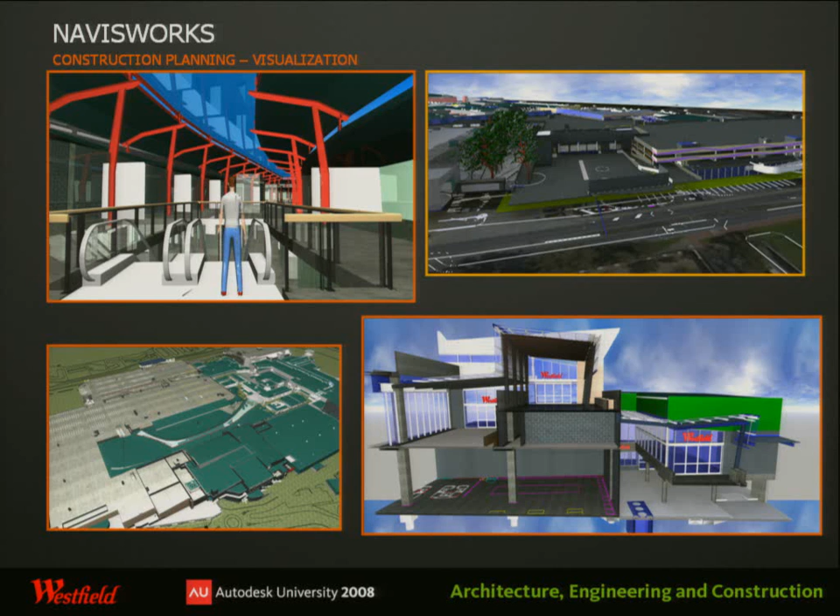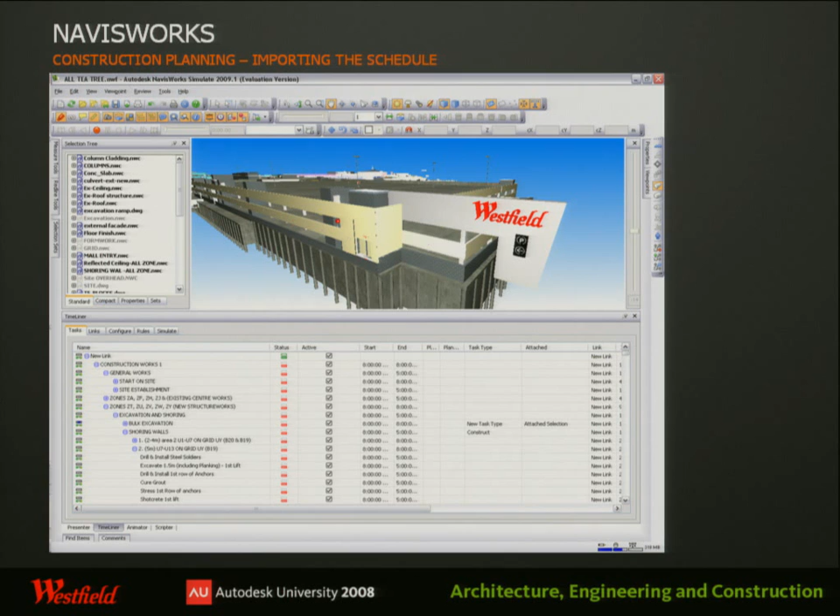Basically, you import the schedule and do all your linking inside there. This is a simulation - an image of a simulation.

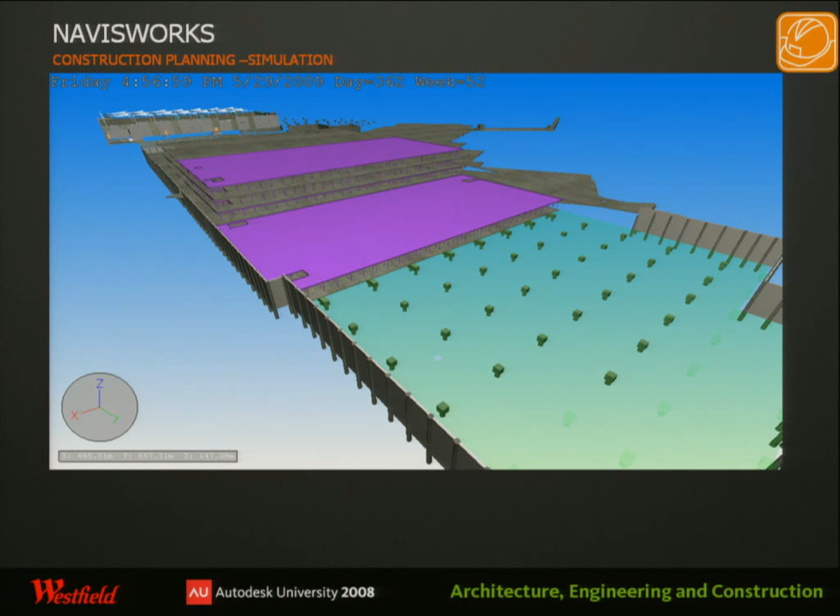Is it worth discussing the difference between animation and simulation? A lot of people get confused about what's a simulation and what's an animation. It's quite simple - a simulation has got the duration at the top, based on your construction program. It's very good to check your program, because you can see if you've poured something out of sequence - it's very obvious because you're actually looking at the file. Okay, I won't show that one.

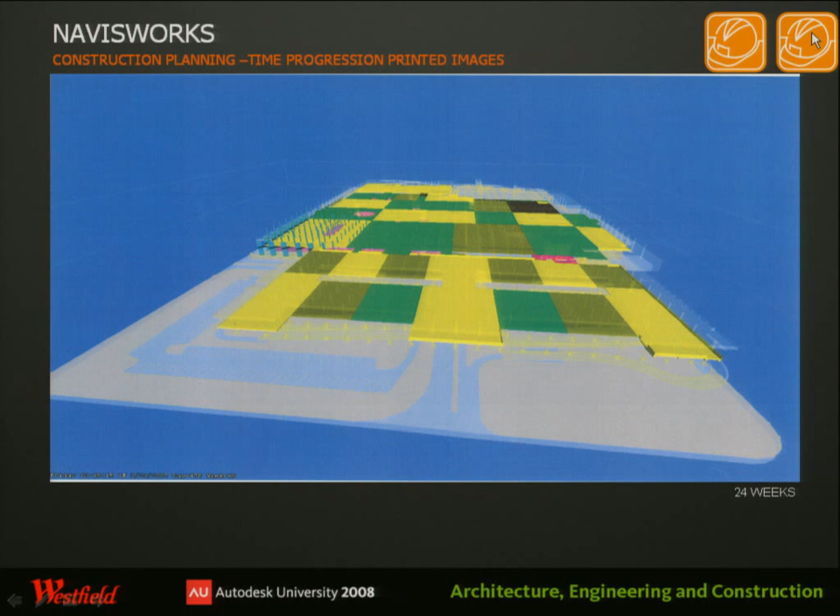What I've been doing is producing images every couple of weeks and passing them out, as well as the animation. So this is what the job looks like after 6 weeks, 12 weeks, 18 weeks, and around 24 weeks.

That's a simulation before - this is an animation. I'll just move that on a bit because it's quite long. So it looks like a simulation, but this is just done in Animator.

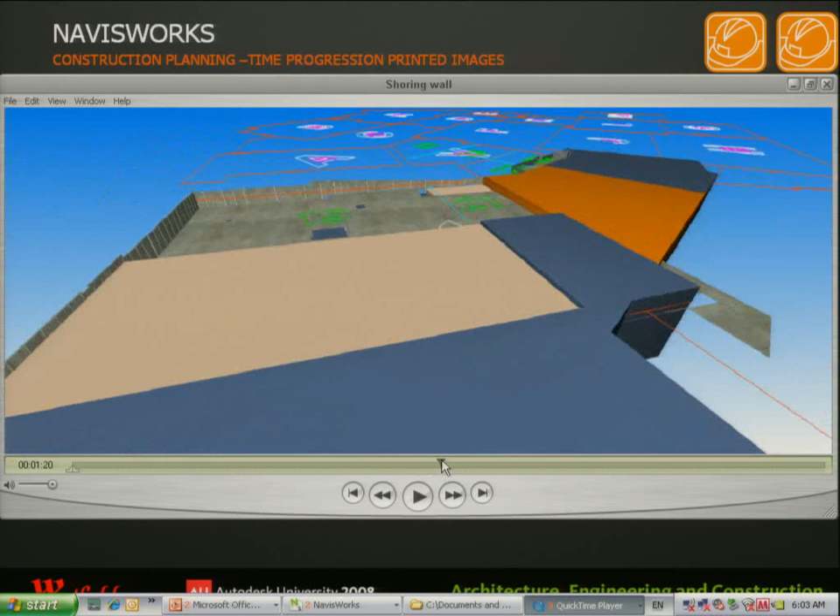You can also notice in this one where the construction blocks, or the zoning, is only a 2D element, but it's been brought into Navisworks so everyone understands where they're up to on the job. That's purely for me really, because I want to know where I am - I can see I'm at block 18, block 19. These are our blocks, and I've got excavation there. These big, colourful things I just went into Revit myself and played with the mass tool, drawing them around those blocks just to give me the idea.

Is there a question at the back? How are your field people using technology in their job? Is it helping your superintendents get the building built faster, and getting ROI and acceptance from that?

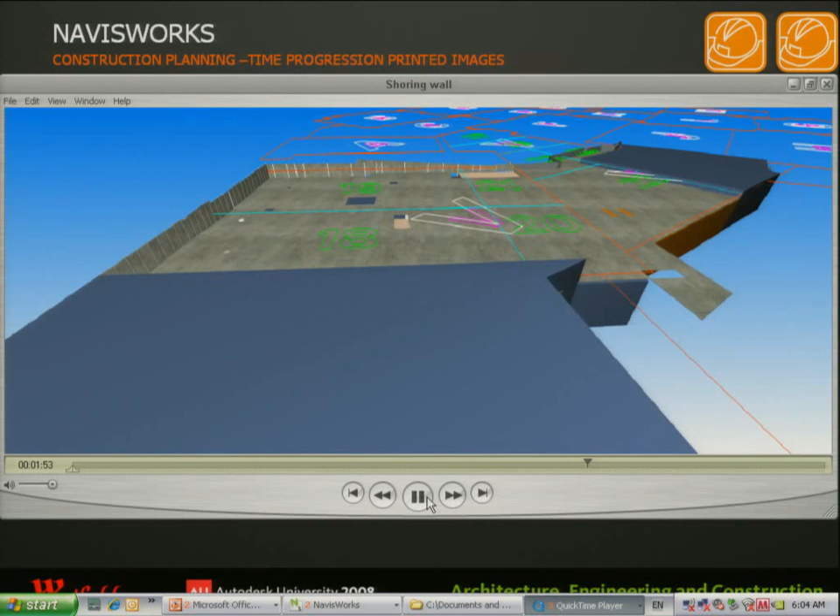Well, it's a struggle to get people to use new technology - teaching new tricks. I've been looking at it for about 2 years, but trying to get people to even look at it has been very difficult. People like foremen, when you show them and walk them around, they say that's great, I want it.

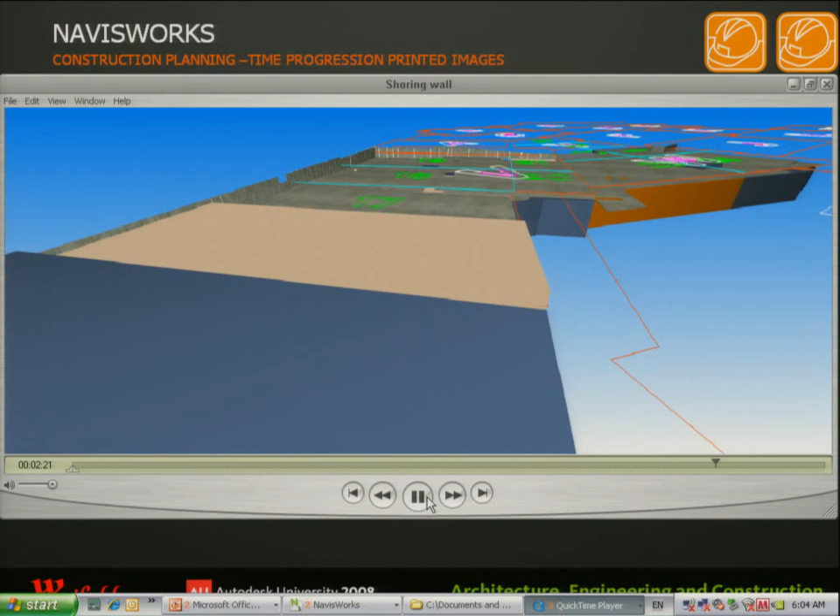It's more senior management, to be honest with you, who struggle with all this. Some of our clients in Australia, from the mining and infrastructure contractors and builders, do use it on site. They've got laptops set up with just the Freedom Viewer. They'll go into some of the large resourcing, like the Fortescue Metals mine site in Western Australia. Everyone checks the Freedom, they know where they're up to, and they get issued new issues of the simulations for that project.

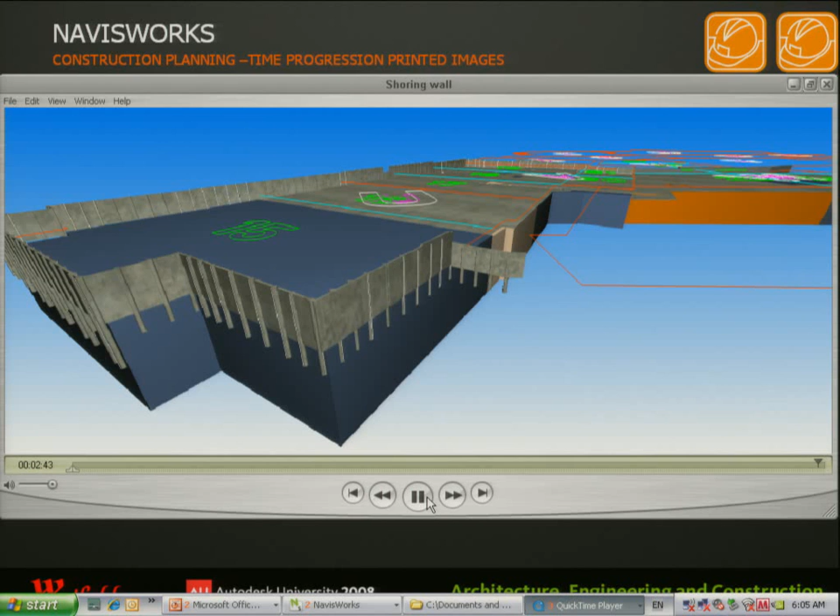You're not quite at the laptop on site stage for yours? No, we've got computers on site, but not laptops.

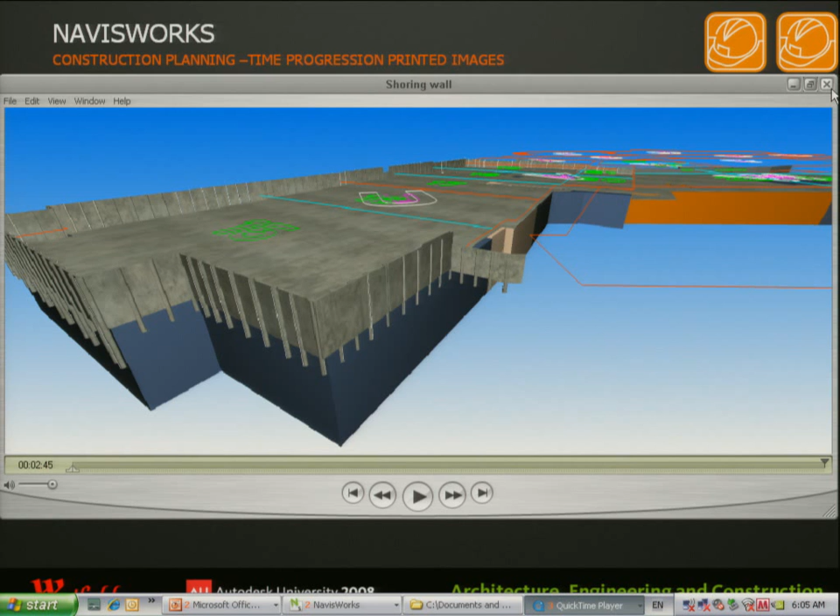That was a question you asked earlier about the individual columns, so you could see the individual columns were coming - the rebar. Ah okay, yeah, you don't have to link. So what I did there was the whole sequence - the question was about simulating even just the rebar insert, so you're staging, I guess, every element inside that pour. Do you have an example, or is that left up to the contractor on site?

In the construction program you get summary bars, so I might put that slab to the summary bar, not to the individual pour. So during construction it's like transparent green, which gives the illusion of the whole duration of the whole pour, including the reo, the formwork, everything. There's that way, or there's the way I'm doing it now, where I'm taking the whole Revit model into Max, and I can actually do each individual column if I wanted to.

Have you got an example of maybe even a slab pour where you've broken that down? Maybe come and see me after - might be a bit easier.

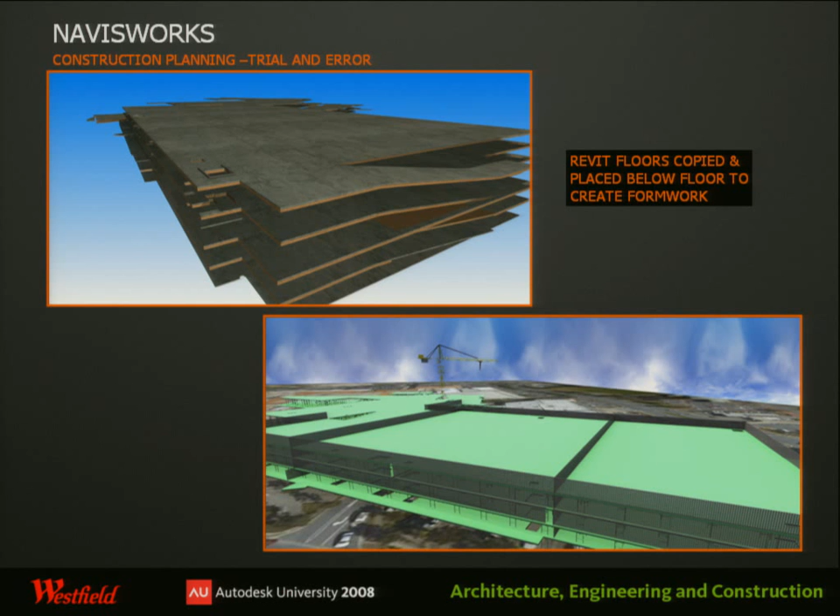So in here, this is a bit of trial and error. I've had to play with Max and going into Revit, copying the floors, copying them down, just to try and turn the whole thing into a construction sequence. We can improve on it, but you can see it kind of works.

The problem with doing reo, obviously they don't model reo, so I'd done this one on the right there. I brought the Revit file into Max and then just put a modifier on that slab to give it an illusion of reinforcement. But again, this is where the process is continually changing. Speaking to some of the construction, the structural engineers that work closely with Westfields, they're keen to now be submitting back the structural version of that Revit file, which will contain the reo, into early on in the design phase.

So you'll have a lot more elements to select from and choose from, so you won't have to go and make your own. Even though I've been playing with it two years, I still feel it's very new in construction. So it is a lot of trial and error at the moment - trying this, trying that.

The question is the value - what value is there to model and rebar? Well, there is none, no - not when I can show you that this slab takes 14 days, and it's transparent green while it's doing that. It's underway, so if it's green I know formwork's going up, I know reinforcement's going in. It's only when it changes to its model colour that it's finished.

So you're right, yeah, in that case you link to the summary tasks. So you're modeling formwork and scaffolding and stuff - why not do it in Revit? Because I can't use Revit.

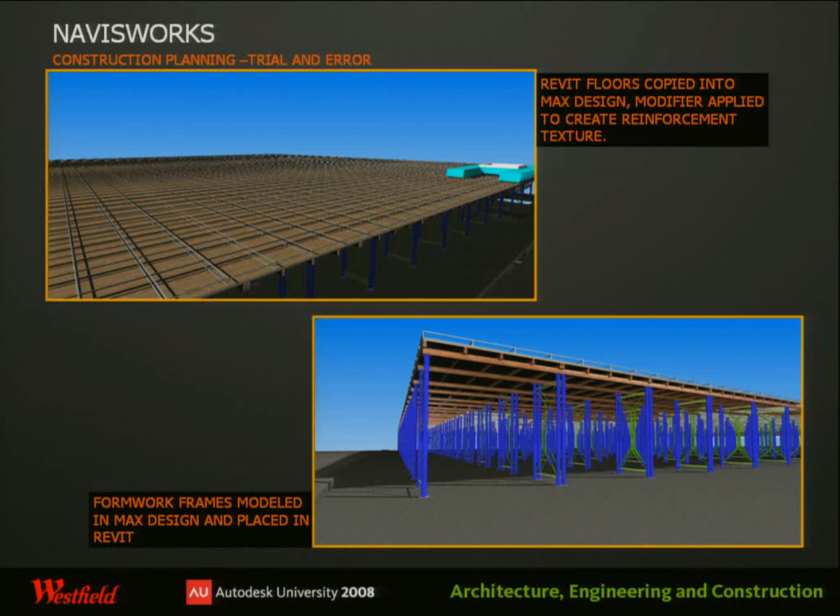Okay, well, I'm on my last slide, and this is answering some of your questions, actually. This is my wish list for Navisworks. Import the Navisworks selection tree into Powerproject itself. Instead of taking all the data out of Revit, I want to take it directly from Navisworks.

The reason I want to do that is because I want to use the model to do my planning, not the other way around. So the model is the Lego? The model is the Lego. And I want to do the instructions using, I'm putting the blocks on, and I want that to be my program, not having these squares and these circles and trying to bring them together.

So you were saying before then that basically, if it did link directly between Navisworks and, say, Asta or whatever the program planning tool was, you'd spend most of the time, your interface would be Navisworks. You'd sort of check the Gantt chart when you had to. That's right, yeah. And it needs to be bi-directional, I've got down there. So you can export out of Navisworks and you can also import the same program.

Create tasks from the selection tree itself. So to make this work, you need to be able to select things in the selection tree and say, create a task. And that will populate the construction program down. You can, but do you want to show that as an example? No, you've got 20,000, so you're going to do a selection set for each one. It's just impossible.

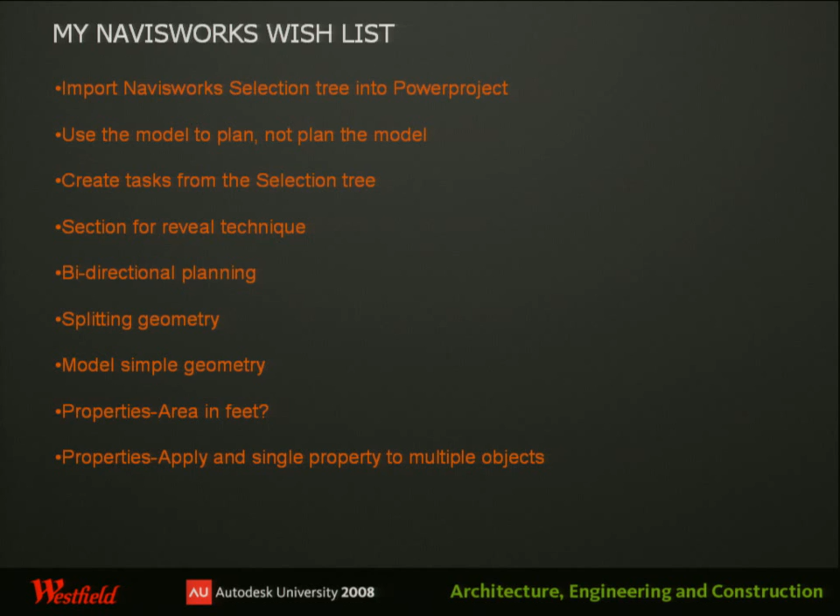And also, thank you. This is our first go at this sort of presentation. A few sleepless nights. But I think what Gary's doing especially, and quite willing to share, one of the things about Westfield not having competition is that they're quite happy to share. The tricks that Westfield have, they're sharing with the rest of the community fairly well. So I think there's a bit of a meeting with Walmart and those sort of guys.

So yeah, ask any questions. Gary's here for the rest of the week. Christian's the actual API programmer that's making a lot of these changes from the Revit model directly into Navisworks, and an ADN member as well. And there's some other Westfield teams here as well that are quite happy to take some questions.